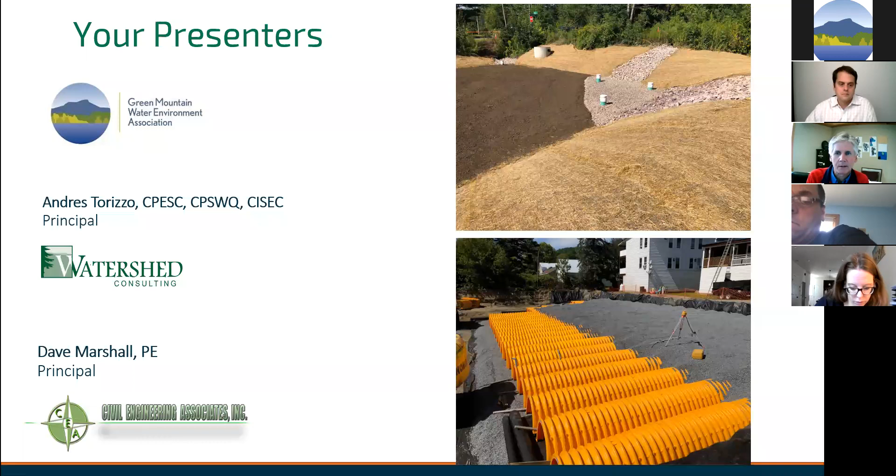This has been a continuingly evolving component of what we do and ultimately what we're seeing as far as the products in the field. So that being the background, we'll have Andres take us to the next level of the presentation today.

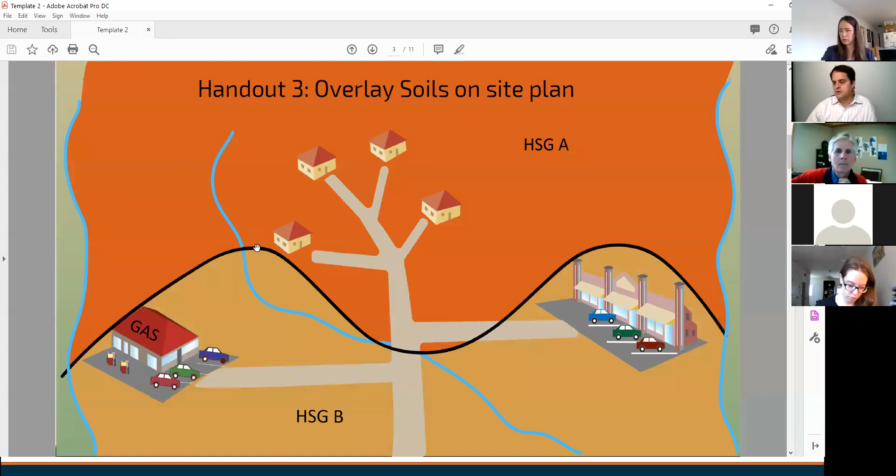And one thing to just know, we did send around some learning information ahead of time, which you all should have. And there's a couple documents in there which will be useful. One is the agenda, which I'm putting up right here. And the other is a series of handouts. And we're not gonna actually get into the handouts today. This is all gonna be on day 2, but if you just wanted to start looking through this and familiarizing yourself with these handouts, these are gonna be needed tomorrow when we go through the exercise. Okay?

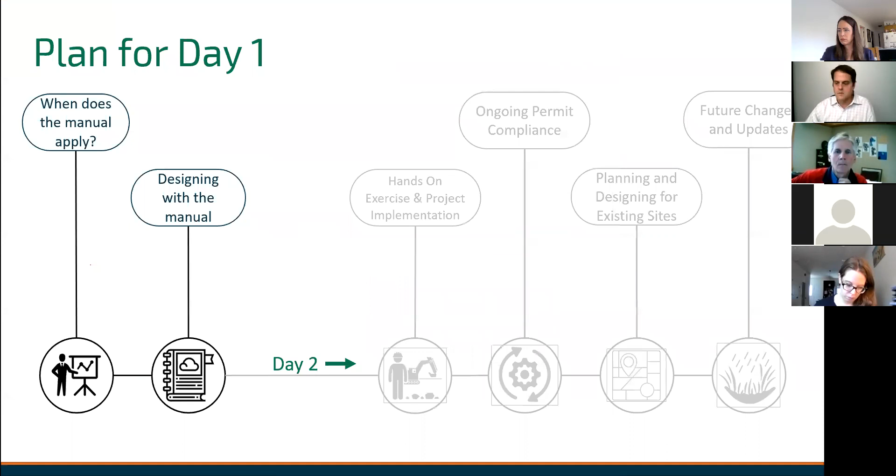So with that, we're gonna start just from square one. So when does the manual apply? So this is a screenshot right from the state's website, Stormwater website. And there's a lot of things stormwater now in Vermont. It's amazing how it's changed since I've been involved with new programs, municipal roads programs, multi-sector general permit programs, MS4 programs. We're focused on the operational permits. And the operational permits currently are 90-30, 90-15, 90-10, or INDS.

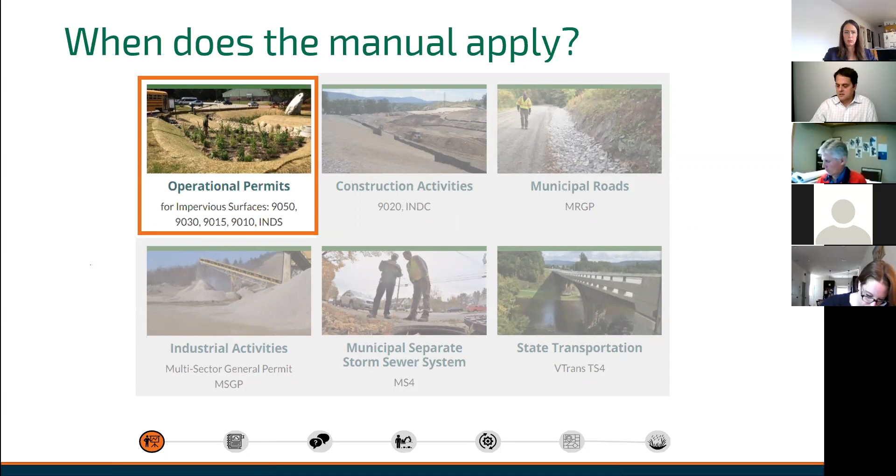We're in a state of change right now. The 90-50, which is the first one listed there, is going to be the only operational permit. Everything is getting funneled into the 90-50. The 90-50, signed September 1st, 2020, going into effect December 1st, 2020, is going to change a lot. I think hopefully simplify a lot in terms of corralling all these permits with all these numbers and kind of streamlining it and making it simpler for everybody to track. So that's really what we're focused on.

And when the 90-15, 90-10, soon to be 90-50, when the operational permit comes into play is a couple different scenarios. And we're gonna just run through these scenarios together here. And then we're gonna save some time after this to answer some questions and chat about this, because there's certainly some odd situations that come up.

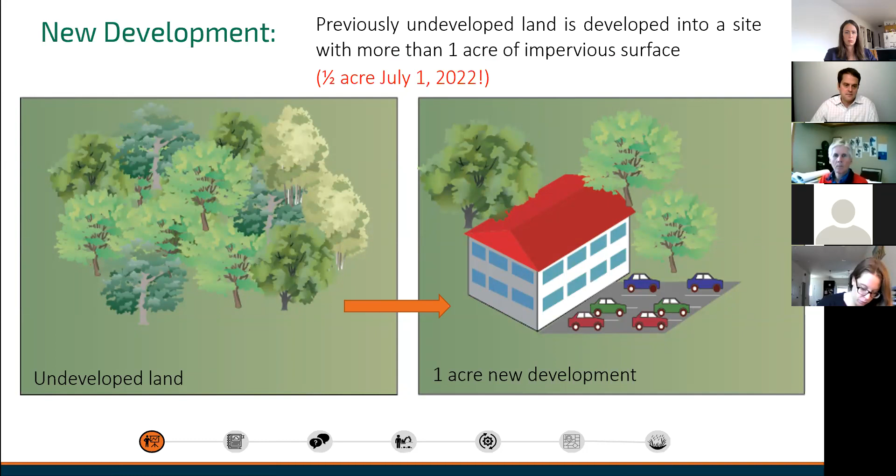I think the simplest one is where you have a new development which has 1 or more acres of impervious surface. And you're creating that impervious surface, you'll need a permit. After July 1st, 2022, the threshold is gonna go down to 1/2 an acre. We also have a lot of situations where we have a smaller development which may have less than 1 acre of developed land, and we're expanding to 1 acre or more of developed land. You're in a permit situation there.

We also might have an existing site which has more than 1 acre of developed land, and now you're adding at least 5,000 square feet of new impervious surface. And so even though that existing site may have been in existence for quite a while, if you're expanding off of it and creating this 5,000 square feet of new development after July 1st, 2005, that new development would need a permit.

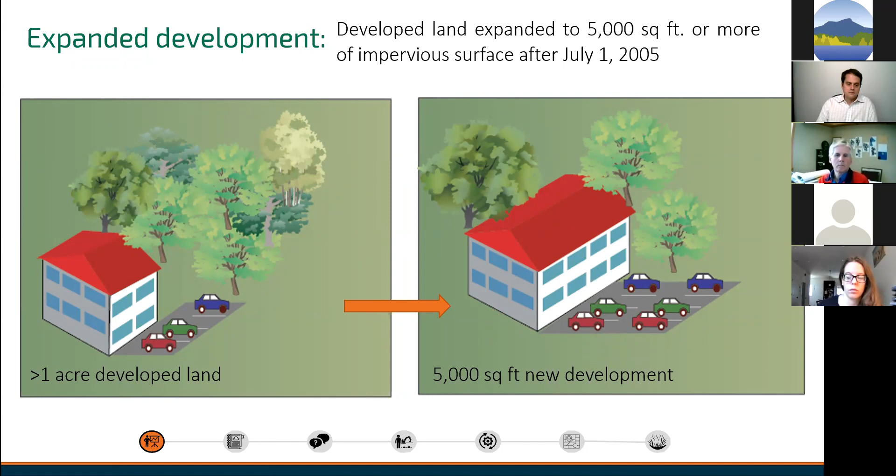Then you get into a situation where you have a redevelopment. So you have an existing site, an acre's worth of impervious surface, and you're suddenly converting that now to 1 acre of developed land. And I think just make a special note on redevelopment, because redevelopment I think is one of these gray areas that comes up a lot. Is it redevelopment? Is it maintenance? That's a big question. And there is a definition in the rule which specifically describes what redevelopment consists of or doesn't consist of.

But I think in terms of, say, a parking lot, it's really when you're doing a full depth reconstruction of the parking lot and you're modifying the drainage. So if you're adding catch basins where there was sheet flow, or you're taking one parking lot which drained one way, now you're draining it the other way, and you're going down into the sub-base and rebuilding the parking lot. That's redevelopment. Same situation if you have a parking lot and you're putting a building. It's redevelopment.

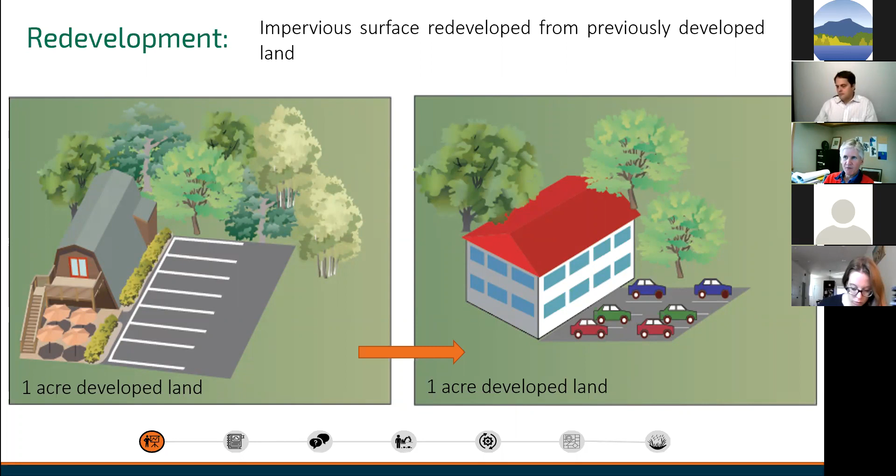Andres, Dave Marshall here. One thing that we ran into that Kevin Burke helped us with was we were rebuilding a city street in Winooski, and the definition from Kevin was anytime you are replacing or redeveloping the top 6 inches of an existing structural surface, that was where you could consider it redevelopment or actually new construction. So that was a refinement of the definition. Because the standards as far as how hard you have to work to deal with the treatment of the stormwater runoff that perhaps didn't have any practices in place prior is different between redevelopment and new construction.

Yeah, that's a good point, Dave, and I think that also goes to the fact that there's definitely some interpretation in these, and it's worthy of a discussion with the reviewer, obviously, about some of these things. As Dave was saying, that was a discussion with Kevin. Kevin, unfortunately, is not with us today yet. Somebody from DEC may jump on at some point during the training, but it's definitely not always black and white.

Also have some, you know, situations where you might have a site with less than 1 acre of developed land, and now you are redeveloping it and also expanding it so that you have an acre of developed land. So it's both the redevelopment and new development combined. You're in a permit situation in that sense too.

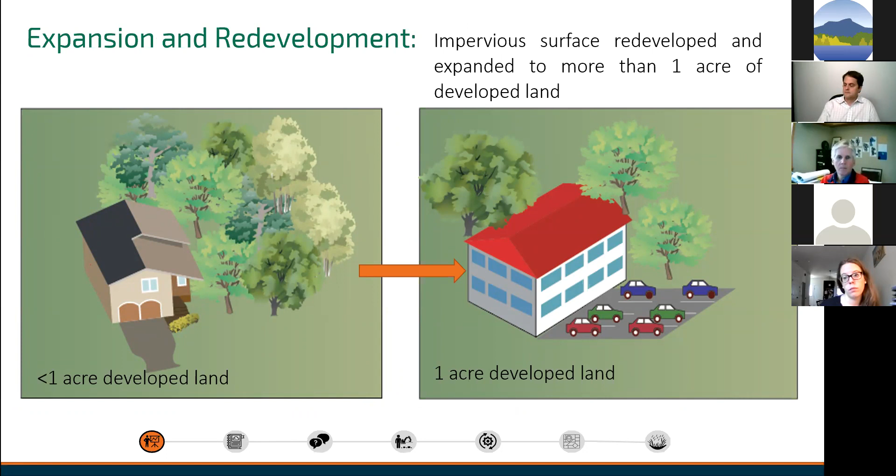And then there's any other situations. The agency actually does reserve the right to issue a permit even if it's less than 1 acre of developed land, if there's a reason that it's deemed necessary by the secretary in terms of an imminent threat to water quality. There is the right to issue a permit. So it seems like pretty much whenever you're guessing whether or not there's a need for a permit, it seems more and more likely that it needs a permit.

In my experience, pretty much everything needs a permit, especially if it's tied to any kind of an existing development. It seems like you're probably in a permit situation. And I think as we go down to a half an acre of impervious, you're going to be getting into situations where even small developments are going to be tripping the threshold.

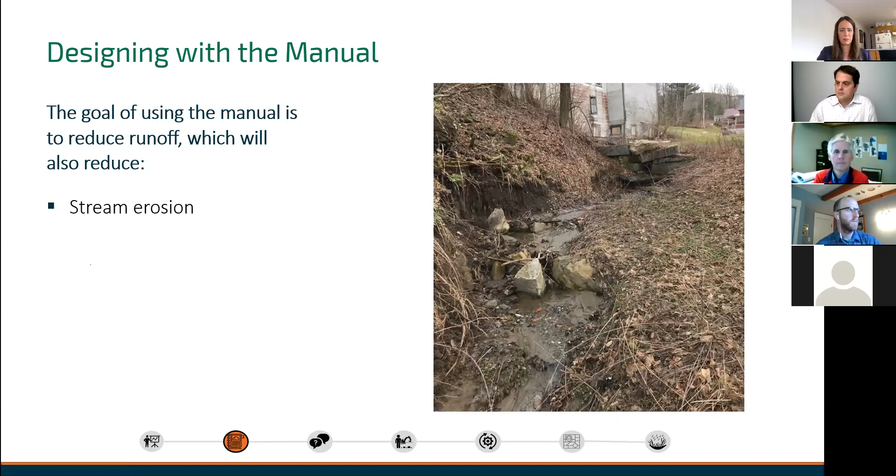So if there's no more questions, we'll move into the next section about the foundation of why the manual is set up the way it is. It's based on this foundation of reducing runoff. And reducing runoff has demonstrated other beneficial impacts to downstream conditions: reducing stream erosion, flooding, pollution, improving water quality, and making sure groundwater reserves are not depleted. So when we talk about runoff reduction, we're talking about reducing the volume.

So not necessarily just taking care of the peak discharge, but really reducing the amount of water flow that's running off a site to begin with. That's a bit of a shift from where stormwater was in 2002 when the manual came out. It was more focused, I'd say, on detention, and now the new manual is structured to guide you to maximizing getting rid of that water on site first so you have less runoff moving from the site. Oh, and I forgot habitat degradation as well.

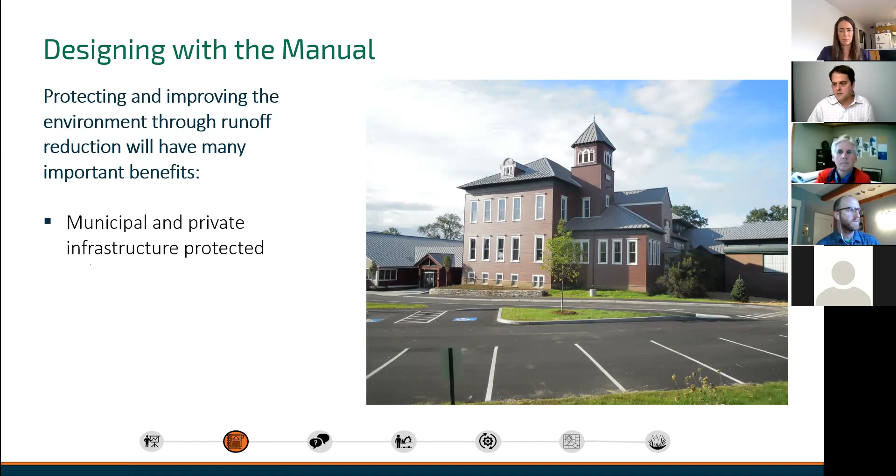So the benefits of this runoff reduction method are many. There's benefits to municipal and private infrastructure. There's benefits in the long term in terms of O&M costs: less O&M costs, less water, less maintenance.

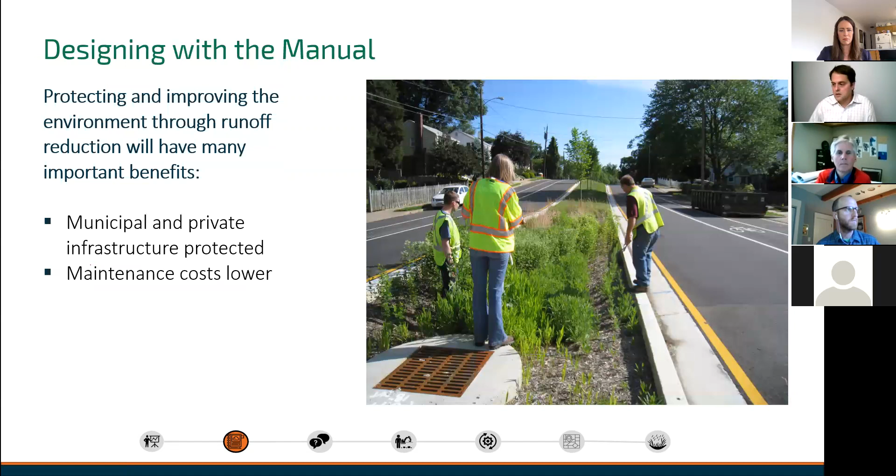A lot of these practices which are focused on runoff reduction have some aesthetic value, or at least some potential to have an aesthetic value, because a lot of these are plant-based systems, and so there's opportunities to improve aesthetics on sites. And then there's community health and safety, and this is really clear, I think, in more of the downtown green infrastructure, green streets type environment, where you're starting to see in a lot of areas in Vermont, downtown areas that are being greened.

There's a lot of ancillary benefits to that greening that go beyond water quality: placemaking, multimodal transportation, sustainability, air quality. So there's definitely a lot of other benefits to this approach that go beyond just stormwater.

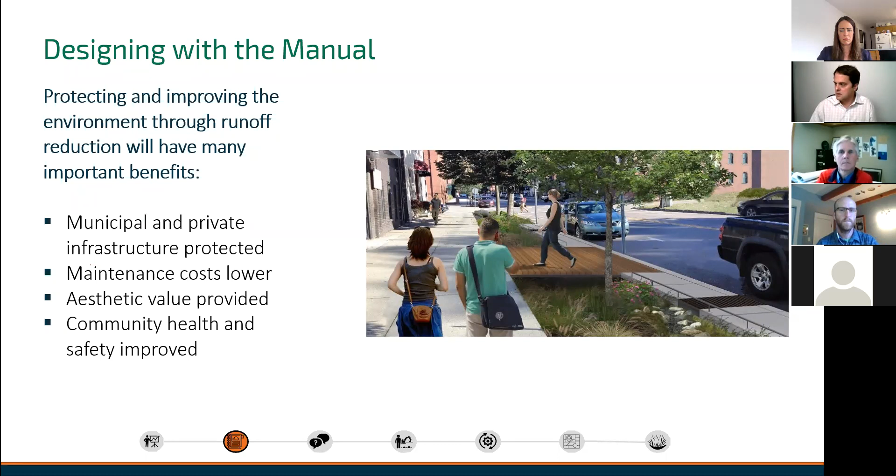And this is an important slide, and this is really the core, I think, of the manual. You're going to see this treatment volume, this T sub V, quite a bit. If you open the manual and look through it, the TV shows up a lot. That's the amount of water that you're trying to reduce by crediting, designing your site a certain way. We're going to talk about crediting, what that actually means, but also installing BMPs. You're going to be calculating this TV, and then you're going to knock it down by doing either structural practices or non-structural. We'll get into the difference of what those two things are a little later.

In the foundation, the way that the manual guides you towards knocking down this TV is through this tiered system. So tiers 1, 2, and 3. The manual is set up so that you need to first analyze whether or not a tier 1 practice is doable on the site. And if it's not, you go to tier 2. And if you can't do a tier 2, then you're going to go to tier 3.

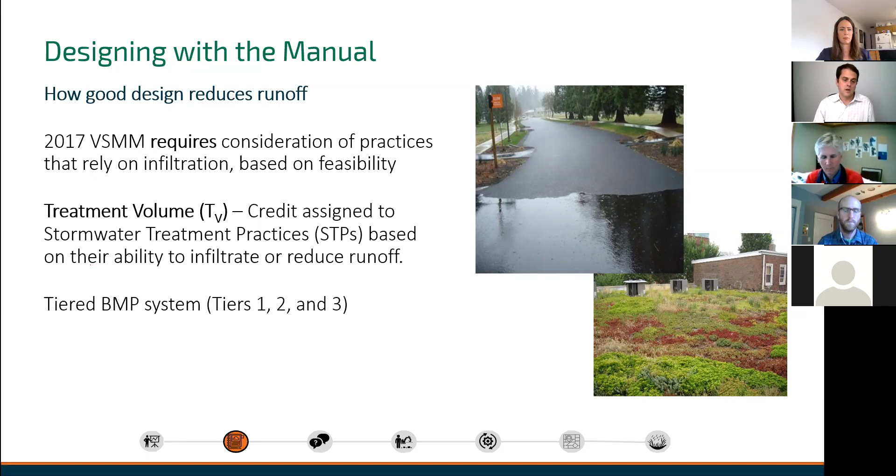And tier 1 are the best practices. Those are the practices that, by the current research that we have, really perform the best and reduce the most runoff and reduce the most pollutant loading. And then tier 2, not as good, but pretty good. Tier 3, kind of a worst case. We're going to go through specifically some examples of each of those so you guys can see what we're talking about. But this is just a graphic here to describe what I had just said.

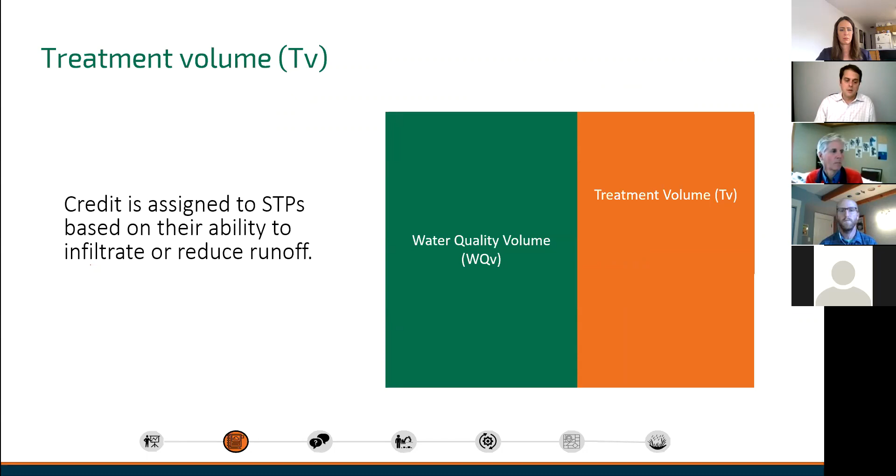So the TV is the overall volume. And within that volume, we're going to talk about some other volumes that are going to need to be calculated for various sites. You're going to have your water quality volume. You're going to have your recharge volume. You're going to have your hydrologic condition volume in some cases. I say in some cases, we're going to get into that one specifically, but I'm going to actually go through all these. That's kind of graphically how it is. So all those are nested within this overall treatment volume.

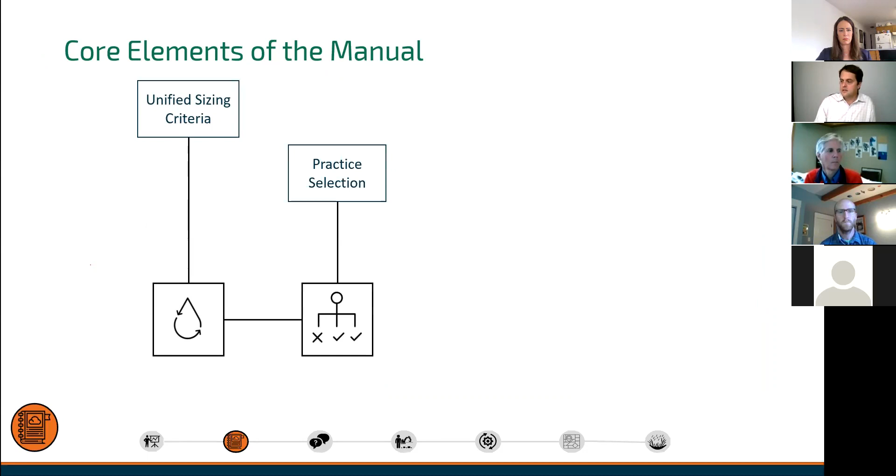So the core elements of the manual: the unified sizing criteria, which are the specific standards, and I'm going to go through that in this next section. Then we're going to go through the practice selection. We're going to talk about infiltration testing, which I think is a really critical component of the whole process, especially because the whole manual is so focused on infiltration. And so there's some really specific considerations for infiltration testing that people should be aware of.

And then reviewing the forms, so making Wynn's life easier when the application comes in, making sure everything is organized how DEC likes to see it. Makes things a whole lot easier for everybody.

So just starting off on the unified sizing criteria. The first one, the water quality treatment standard. With the water quality treatment standard, we're looking at sediment and phosphorus. We're looking at all the pollutants in the stormwater. And we're looking at managing those small but frequent storms.

Groundwater recharge, we're really looking at all storms, but we're looking to maintain groundwater levels. We don't want to develop a site, basically a nice A site with sandy soil, and then all of a sudden we're paving it, dramatically reducing the amount of infiltration, the groundwater table drops, less base flow in the stream. That's not a good situation. So we're trying to protect that by maintaining groundwater recharge.

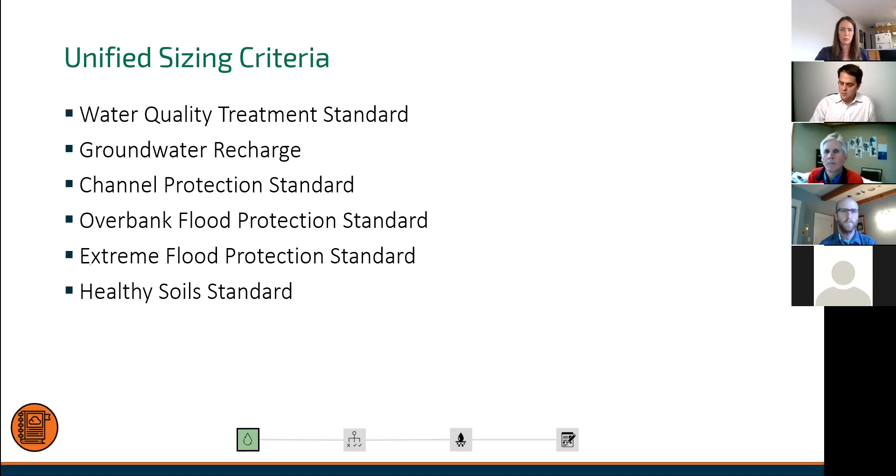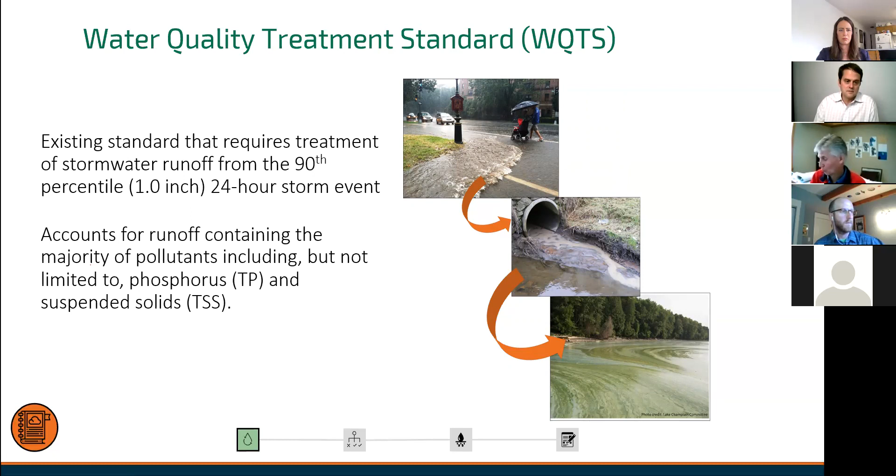Just to dig into this a little more, talking about the water quality treatment standard, as I was mentioning, it's the 1-inch storm, so it's a 90th percentile storm, 1 inch, 24-hour storm. So that is where the major source of pollutants are originating, including phosphorus, our target pollutant here in Vermont, and also sediment, right? So we have phosphorus, we have algae blooms. All that is a consequence of our managing our small flows. And in addition to large flows as well, which I'll get into a little bit.

So in the context of when we talked about the difference between new development or expansions and redevelopment, that really comes into play with the water quality treatment standard. In a new situation, you are managing the full water quality volume, so that's 1 inch of rain. But in a redeveloped situation, where you're redoing a parking lot that's already there, converting it to something else, you're only required to treat 50% of the water quality volume, or removing 25% of the existing impervious surfaces, or a combination of the two methods. So essentially you're getting a break from the full-blown manual requirements when you're in a redevelopment situation.

And this is going to come into play tomorrow when we talk about the new 3-acre rule. We have some slides on that, and the redevelopment standard is going to apply to those sites. So that's essentially how you're going to view these 3-acre sites, through this redevelopment standard. So it's 50% of the water quality volume.

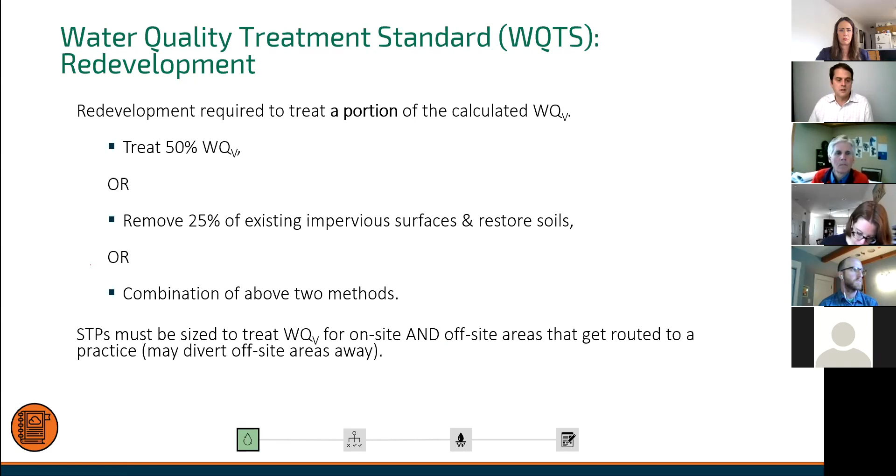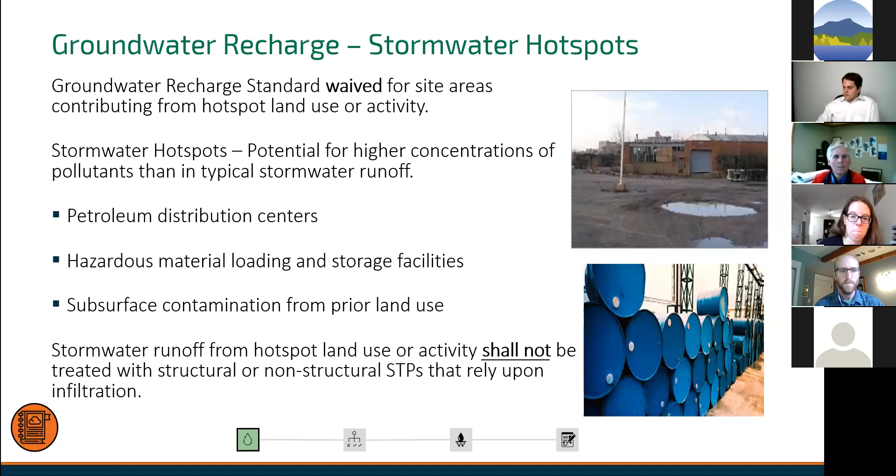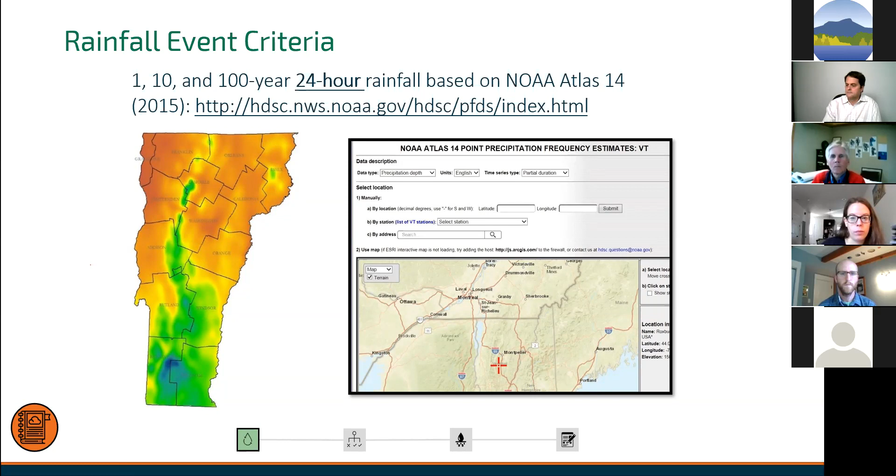So the channel protection standard, the new manual allows a little more flexibility in terms of how you can go about meeting this standard. And one of the ways, there's 3 different ways, and I think the new one that we'll talk about first is this hydrologic condition method. In the manual, you'll see this as HCM. So that's really this runoff reduction focused approach.

And so I'm going to get into what exactly that means on a few slides, but essentially that means just reducing, we talk about reducing the volume, the framework of the manual. This is specific to reducing the volume of the 1-year storm coming off your site, and you can claim compliance with that standard by knocking that volume down.

The second way is the extended detention method. So for those that have been working in the 2002 manual, same idea. So having a big area, a pond, draining it through a small hole. So really metering out that 1-year storm over a long period of time to eliminate this peak into the stream, which has impacts to the banks because the stream is running high and it's running long and it's weakening the banks, and you get in-stream erosion and instability. So that's really what we're trying to prevent.

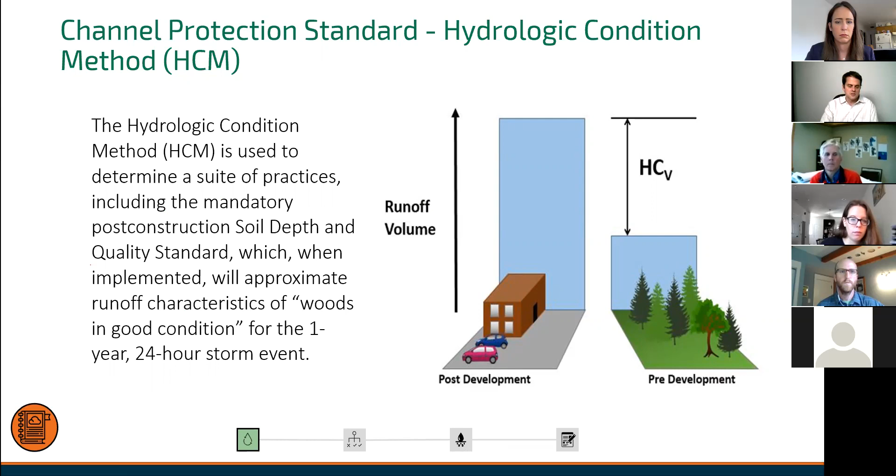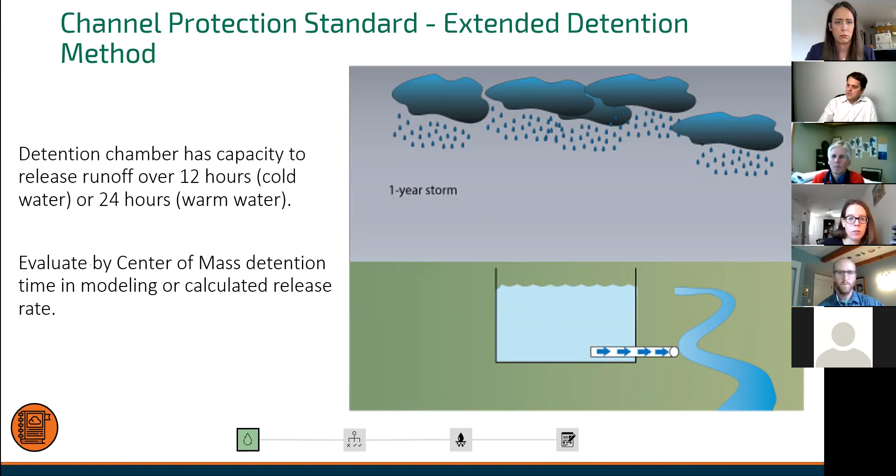So the second, extended detention method, so this is the one that's been around since the 2002 manual. Here's our pond. This is our outlet. Imagine you have a small hole on the end of this pipe, collecting all that water and just bleeding it out that small orifice. That's the extended detention method.

And then you have a proposed condition where you just have that water dispersed and diffused. And if you can demonstrate that the peak discharge is the same in those two conditions, then it should be acceptable just to go with the condition where it's diffused, because essentially the diffusion is doing the work that putting in this basin would be doing. That's what you're proving out, that, hey, same thing. We're getting that benefit by just diffusing the site.

And so that could be a good tool if you have a site where you're really trying to diffuse the water, not really collect it all in one location, potentially save on cost by doing some lower tech solutions. That could be a good option to explore.

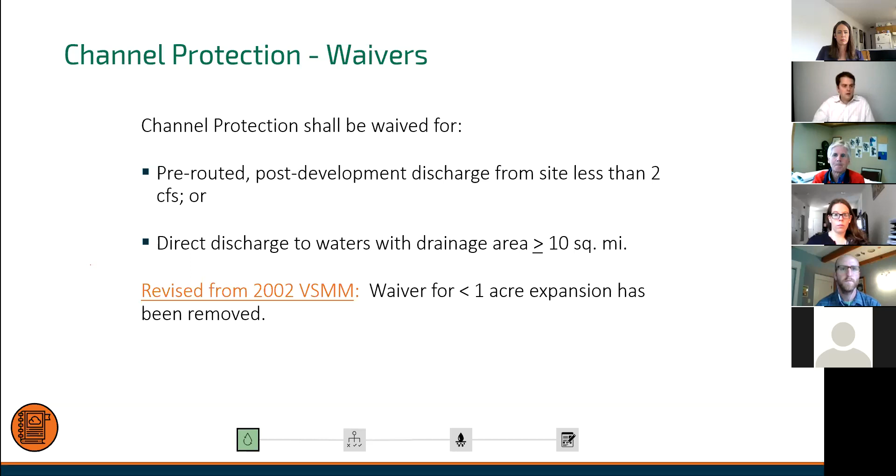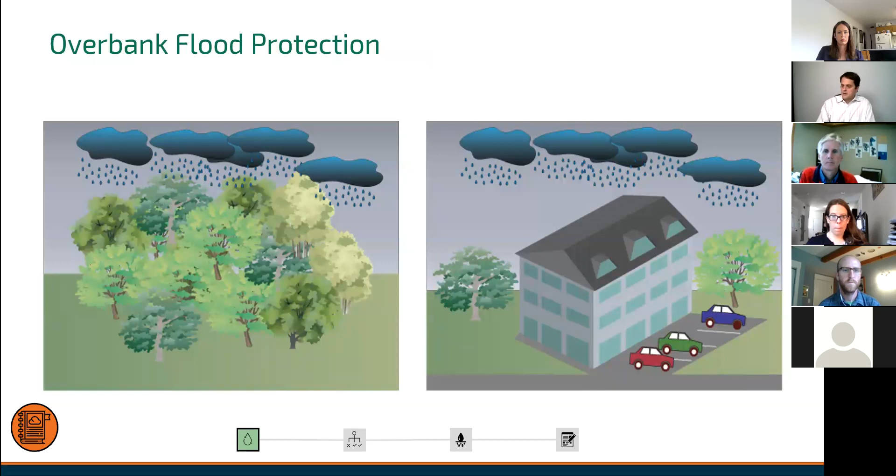So with the overbank flood protection standard, we have on the left, this is your undeveloped site, and then on the right is your development. So following the 10-year, 24-hour storm, peak discharge is equivalent between the undeveloped and developed sites, or preferably even less. But again, this is something that's borne out with hydrological modeling, understanding what your peak discharge is in the existing condition on the site that you're starting with versus post-development. Making sure to match, bring down that peak discharge for the 10-year after development.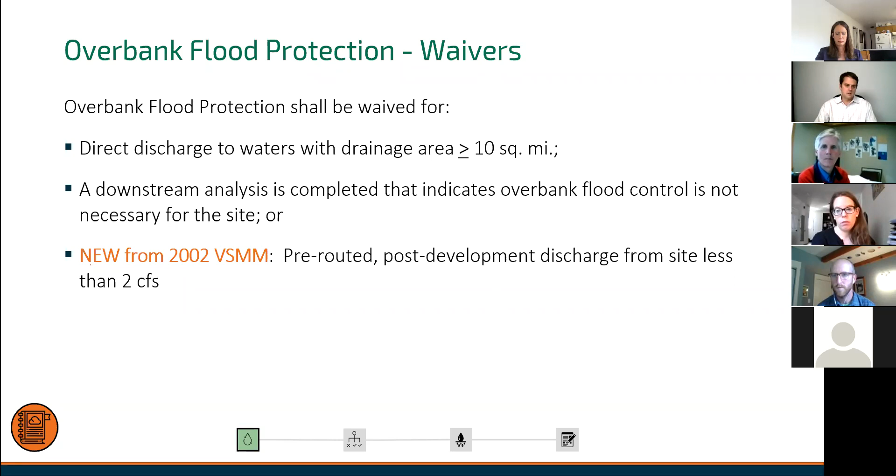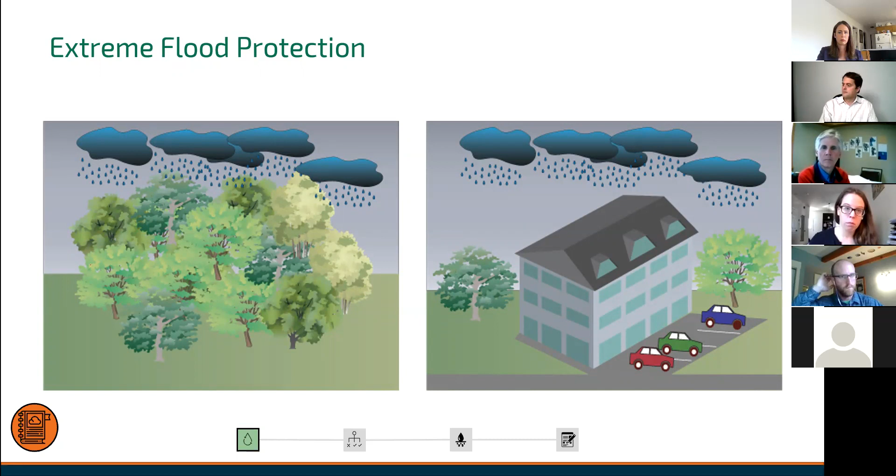So then the extreme flood protection standard, as we talked about, getting into the sites where you have 10 or more acres of impervious surface. So these are the big shopping centers, college campuses, the largest kind of development sites in Vermont are subject to the extreme flood protection standard. So just like the 10-year, but really just looking at the 100-year, which is 5 inches plus of rain, peak discharge is equivalent between the undeveloped and developed sites. Preferably less, right? Preferably we're designing things which are actually even going to reduce that peak discharge.

So with the waivers that are allowable, same one with the 10 square miles, we talked about that with the channel protection, and then also the overbank flood protection standard, same waiver applies. And then talking about if the impervious area on site or otherwise associated within a common plan of development constructed after 2002 is less than 10 acres. So remember we talked about that, where you draw that line.

So there is a way, but essentially, if you're in a situation where you've developed more than 10 acres after 2002, you're going to be in a situation where you need to meet the 100-year standard.

Yeah, and then, I'm sorry, I'm just being rude. Just going back to the statement or the term common plan of development, that can bring in a lot of properties that perhaps a client or an applicant does not control. So one of the rules of thumb that we've been advised to use is, for example,

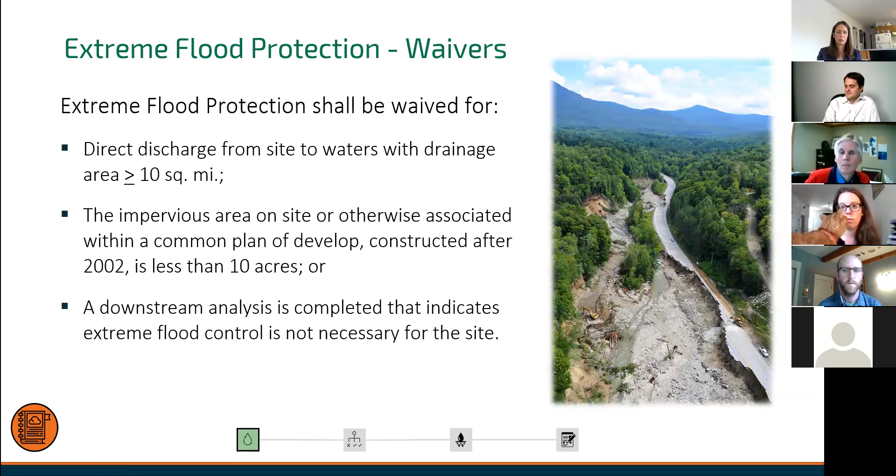So then after the 100-year standard, talking about the post-construction soil depth and quality standards. So this is a new standard in the manual. And Dave, you can run through this if you'd like, or I can, either way. Yeah, we'll kind of tag team this one. This is, as Anders points out, a new component, and this is one that we're wrestling with contractors to implement as part of the construction phase.

Specifically, the goal is to restore the soil profile in a manner that is representative of what the pre-development conditions were. So one thing that we've historically seen, if you can imagine a building being put in place and you have all sorts of construction equipment around the outside of it, you probably have had the contractor strip the topsoil and stockpile it off the side, but underneath that top 4 inches of topsoil that's been stripped off is the substrate, and that just has historically been compacted significantly

only because of all the lifts, all the other construction equipment accessing the perimeter of the site, to the point where when there is a series of storm events that otherwise could be stored in the vertical profile of the soil, it might be stored in the top 4 inches, but everything underneath is so compacted that it doesn't infiltrate in. And we now essentially have more runoff than what we had from a modeling standpoint of pre-development conditions.

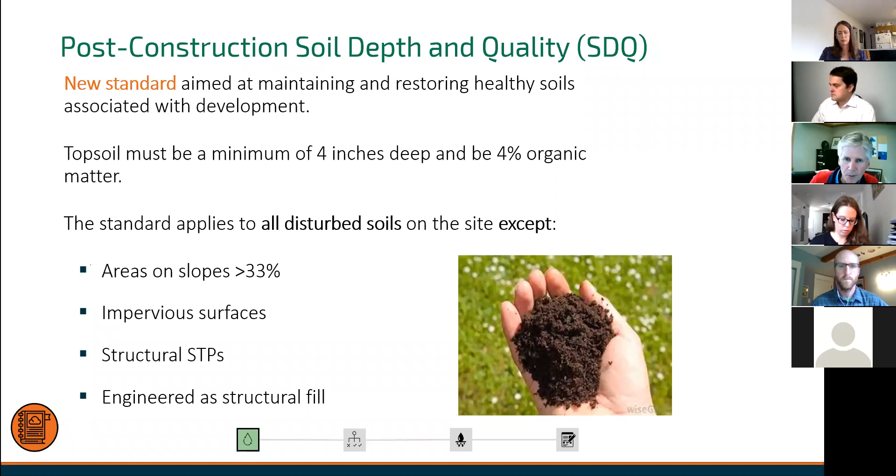There are situations where we design over steepened slopes or certain functions on the site that rely upon very stable soils and not loose soils to provide the structural integrity from a stability standpoint. And those particular features or components of a site are also exempted. So if we can go to the next slide, we can talk a little bit about exactly how this occurs.

And one option simply is don't mess around with the existing topsoil. So if you can create a situation where you make a physical improvement adjacent to undisturbed area, and you can basically protect that undisturbed area from anybody driving by mistake or otherwise on top of it and creating compaction, then you basically get a free pass in regards to having to modify that.

But in those particular areas where we are stripping topsoil and looking to replace it, we need to, in the top 4 inches, as you can see on the right side of this screen, basically make sure that those particular soils that are going back do have the 4% organic component. And if you're fortunate that the native soil already has it, then you're good to go. If it doesn't, then you need to be adding some soil amendments, most often some form of compost, to beef up that particular organic content.

So again, the ability to understand this ahead of time is so important to basically make sure that your specifications and design plans and permit plans are properly reflecting where you're coming from and where you need to go. So especially for the contractors, because soil testing will tell you what you've got for that organic content. And more importantly, it'll allow your contractor to understand just how much amendment he or she will need to put into place in order to comply with the requirement.

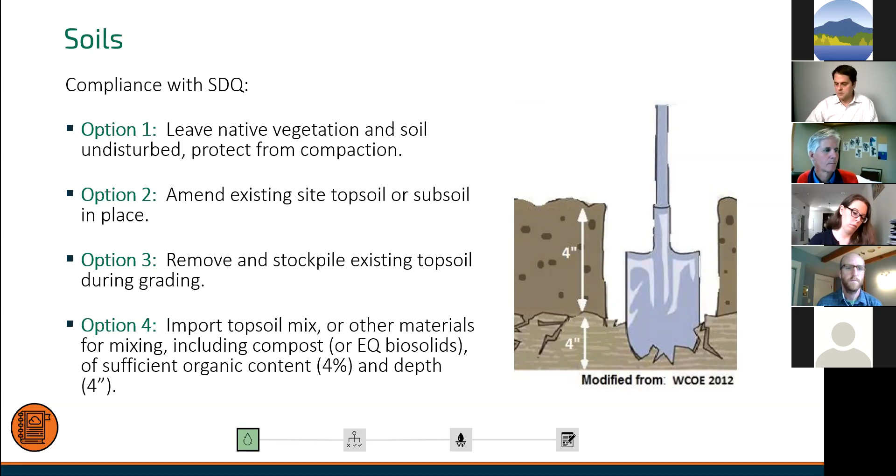So I had noticed in the chat there's some really good information that people should pay attention to from the state, from Hugo here. We were talking about contamination, potential impacts to contamination, and one of the pieces of information here is that the sites management section has guidance on conducting subsurface work within the right-of-way that is very nearly in final version. And then confirming the ANR Atlas is definitely a great tool. So we were talking about looking at potential hazardous waste sites in proximity to our site.

Andres, can I say something? Please. Yeah, I've done a lot of projects in hazardous waste for like 35 years, and there is growing work of stormwater management in the urban centers. And so the problem is that it's not just only the sites that are listed, but there are historic conditions that have not yet been found. And if someone doing a stormwater project inadvertently digs into that and mobilizes the water or extracts soil and transfers it somewhere, they need to understand that there will be liabilities post that work, because if somebody subsequently finds this is contaminated, that dirt needed to be handled in a different way.

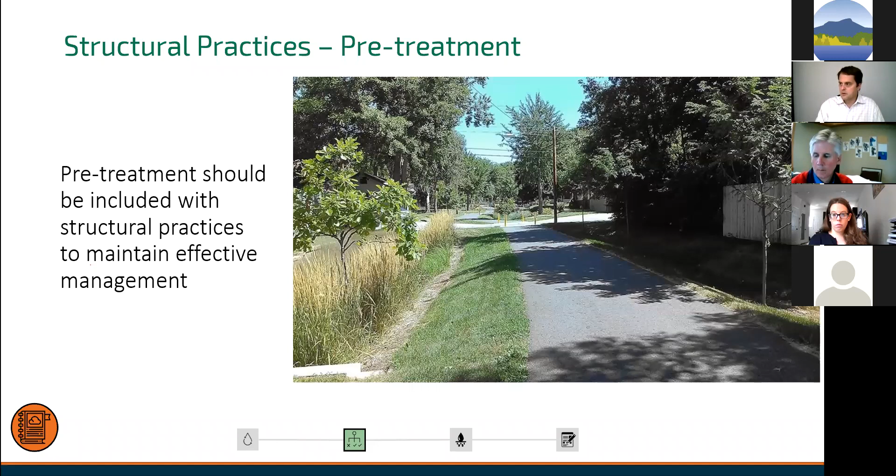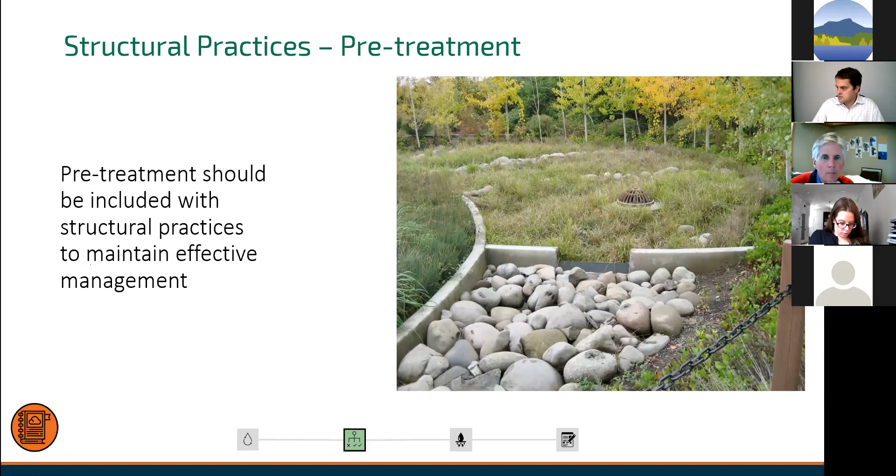This also gets into a question of alternative treatment practices. I'm not sure if Wynn is back on yet, but he could probably speak to this. Yeah, he is here. In terms of how the DEC is dealing with all these new systems which are coming out all the time. And some of them are great, but there has to be some way to make sure that they work and make sure that they're meeting the standards. And so the state now has a process for basically reviewing and approving these alternative treatment practices. Wynn, would you mind just saying a word or two on that?

Yeah, so there's a proprietary practice section in the manual, and it lays out what's required. For the most part, third-party field testing has to have been done. And based on that, if it's a pre-treatment practice, we would need to see that it removes 50% of the total suspended solids. And if it were a treatment practice, we would base it on our tiering protocol of our manual practices based on the removal rates of phosphorus and total suspended solids. So tier 1 being 98% TSS and 80% phosphorus, and then it goes down from there.

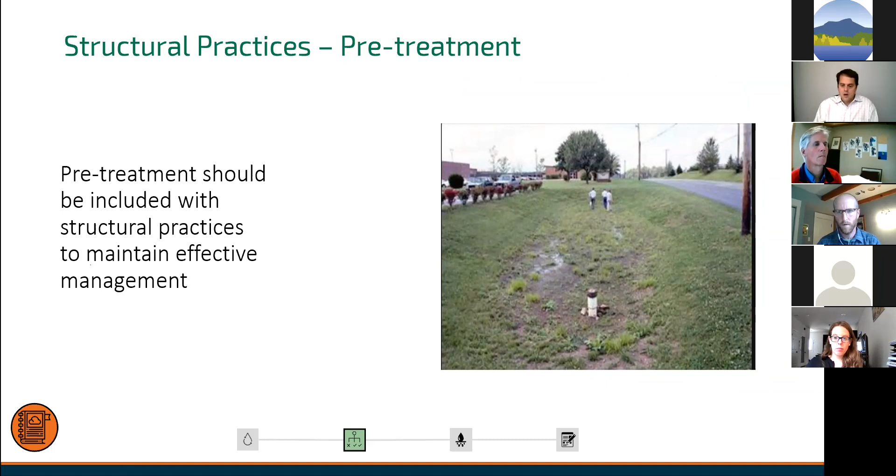Another pretreatment structure here, swale. Swales used to be primary treatment. They're no longer approved for primary, so they're now just pretreatment type structures. So in lieu of a forebay, you can have a swale. And this is kind of a busy slide, but it gives you an example of some of the things in the manual in terms of the criteria for being able to demonstrate that you have a structure which is going to qualify as a pretreatment structure.

So in terms of the swale, you have to demonstrate that you have a 5-minute residence time of the water quality storm peak discharge. So what does that mean? First of all, how do you prove that out? The easiest way is through modeling again. So modeling the 1-inch 24-hour storm, which is the water quality event, modeling that flow through your swale, and then looking at your modeling results and seeing the detention time within the swale, making sure that water is going to be sitting in the swale for at least 5 minutes on average as it travels through. And that's an assurance that there's going to be enough time to have the sediment and materials drop out into that pretreatment swale before it goes into the main structure.

The manual also has an allowance for a filter strip as a pretreatment structure. And this table, I think, was inadvertently left out of the manual. I'm not exactly sure that it hasn't been replaced with an updated version. I don't believe it has, but there was a table originally left out of the manual by mistake, and it was related to these parameters, which describe how long your filter strip needs to be and the slope of the filter strip. So when we say filter strip, what do we mean? Essentially just a grassed strip off of, say, an edge of a parking lot where the water can sheet flow over that area and get the pretreatment necessary before it goes into something like a bioretention area.

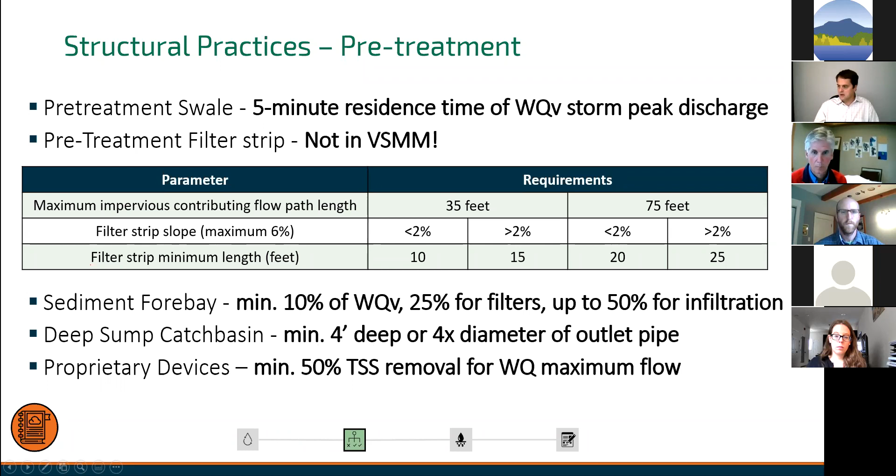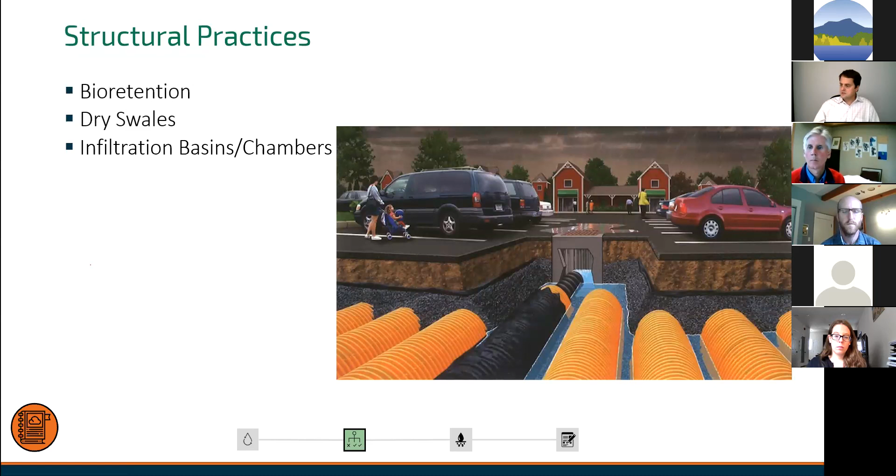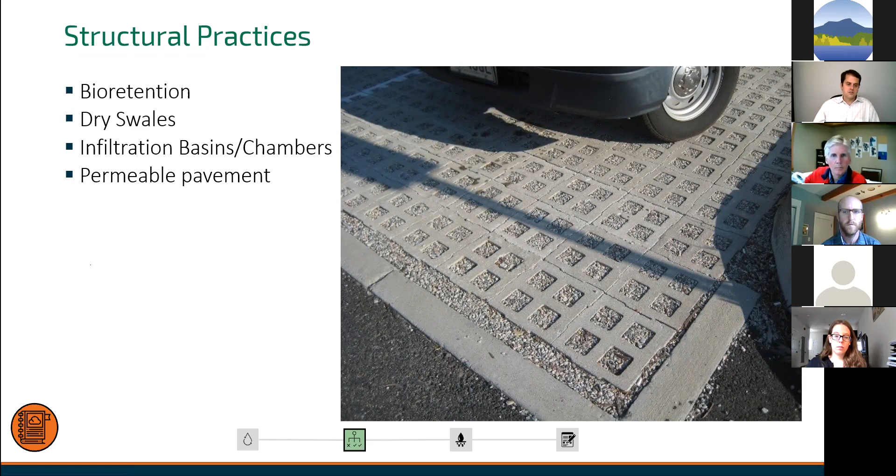So now moving from the pretreatment to the primary treatment structures, we're talking bioretention, dry swales, infiltration basins and chambers, so these are underground. Permeable pavement: getting back to an earlier question, permeable pavement is a way to get out of a permit to begin with, but it's also a way to manage your stormwater if you're in a permit situation.

Filtering systems, so sand filter. Treatment wetlands. Gravel wetlands in particular, I think, have become much more popular. There's a ton of them being constructed now, where normally people would have been constructing wet ponds. So that's a very popular practice. And the wet ponds and dry ponds are still around.

We were talking about the tiers, and a wet pond is a tier 3 practice. So you really have to show that your site needs to have a wet pond in order for it to be approved. Wynn might confirm this for me, but I think the case where you would see a wet pond most often is if you had an existing site with an existing wet pond, and you're expanding the site and need to modify that existing wet pond.

The state is not necessarily going to make you convert that wet pond to a higher performing structure. I think the fact that it's there to begin with could be justification that you could essentially just expand it out and stick with that current BMP. Is that still the line of thinking, Wynn? Yeah, that's generally the way it's viewed.

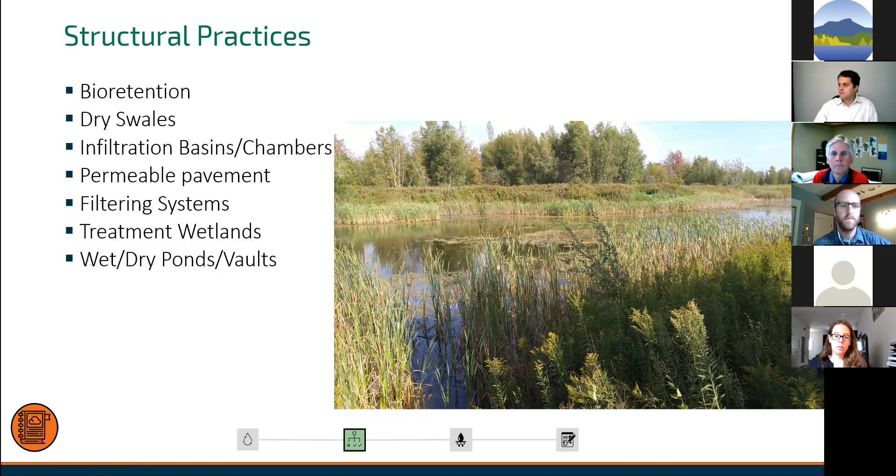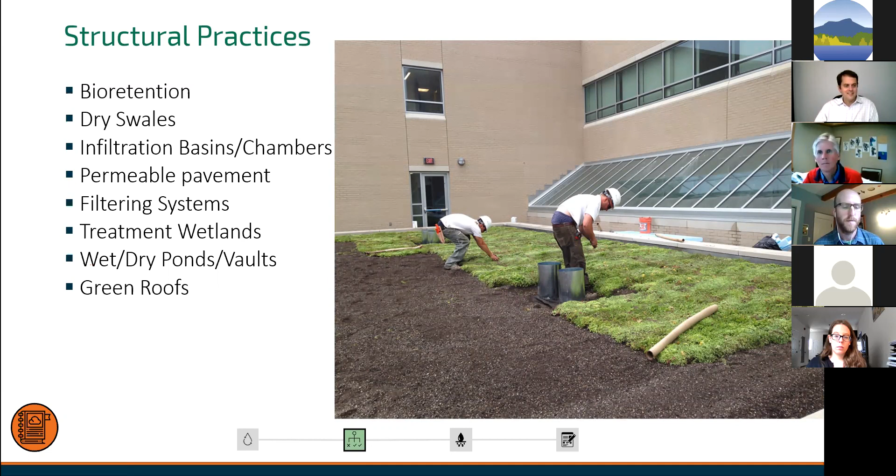Green roofs, not super popular. Wynn, have you ever even seen one of these come across your desk? Maybe at the airport or something. But not many, no. Rainwater harvesting is definitely becoming more popular. So capturing that water and reusing it as gray water on site is an option now in the manual.

Alternative systems, we talked about these in the pretreatment section. There are also some primary treatment approvals that the DEC has that can be functional for standalone compliance, and I think the jellyfish is one of them. They're not cheap. They're compact for sure, they can be put underground, and they're great in a retrofit situation.

But they require maintenance of the cartridges over time, so there's some pretty significant maintenance costs. Like anything, there's no silver bullet. They definitely have a great place, but a lot of the proprietary stuff is expensive over time and sometimes requires specialized equipment that a smaller municipality might not have access to. So it's just something to consider. But more and more, it seems like the state is approving these alternative treatment practices, so there's just more tools in the toolbox.

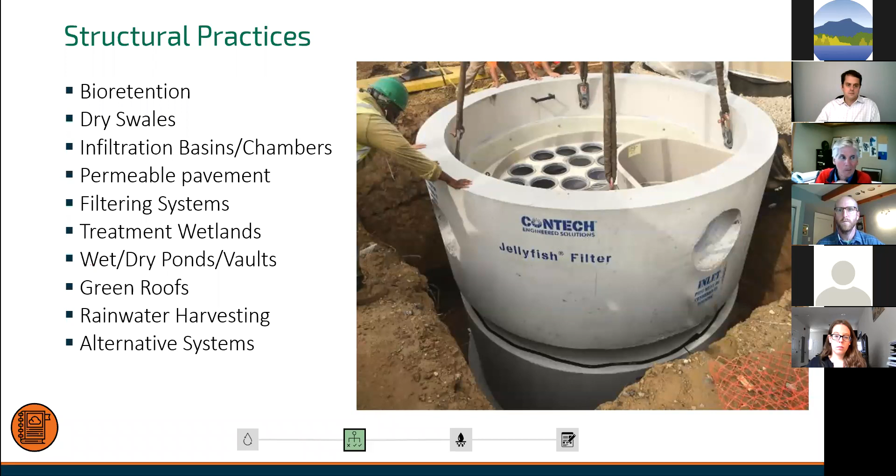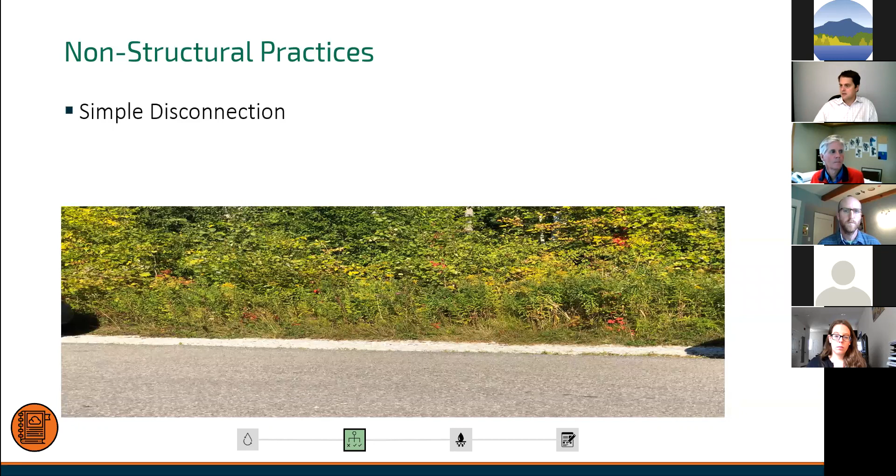So we talked about the structural stuff. So the non-structural practices, I think the manual is more focused on non-structural. So diffusion, dispersion, just passively treating stormwater as it drains the site. When we talk about non-structural things, we talk about simple disconnection or disconnection to filter strips and vegetated buffers or reforestation. These are really the key non-structural practices.

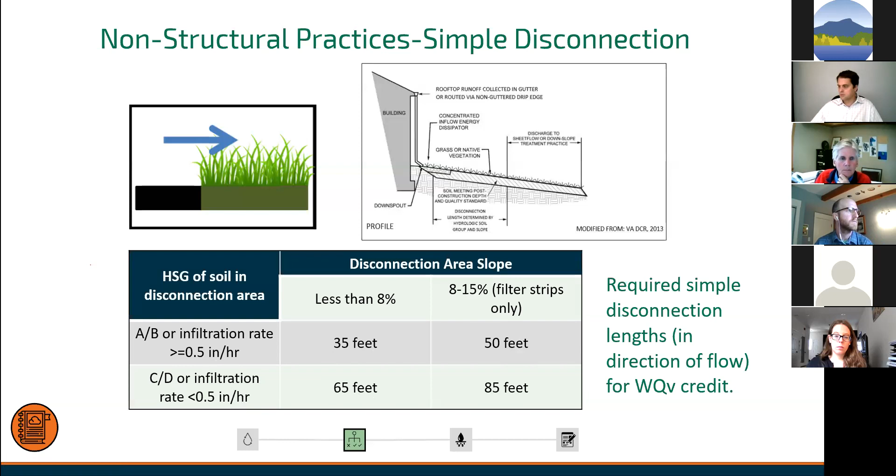So where we have a good soil, an A or a B soil, or an infiltration rate of greater than or equal to 0.5 inches per hour, we're looking at a disconnection area of 35 feet if it's gently sloped, or 50 feet if it's up to 15%. And as we go down to the soils which are not going to infiltrate as well, the lengths get longer. So you're going to need more disconnection area to provide that same level of treatment. So that's why we have the longer lengths. So that was simple disconnection.

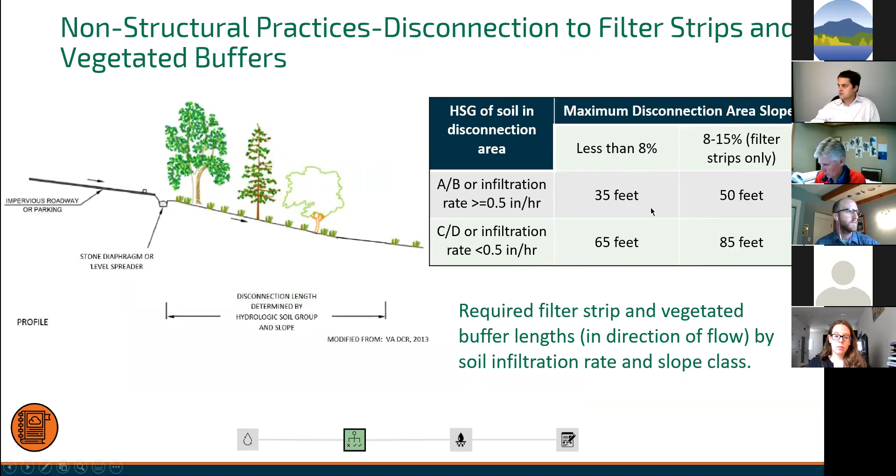The disconnection to filter strips and vegetated buffers. Really the same concept. Essentially just taking water from an impervious surface and diffusing it over a pervious surface. In the case of a vegetated buffer, we're really talking about more of a planted, not necessarily a grass area, but like a planted area. And we have the same requirements here for the disconnection area and the slope requirements, same kind of thing.

So maybe in the future, if there could be some justification to back it up, you could get more benefit, more credit, which would then encourage people to utilize this credit more often, because I don't think it actually ends up being much in terms of the overall volume. But it's something. And if you're doing it anyway, you might as well take credit for it, or it could be that motivation to do it, right?

So this is, touched on this before, right? This tiered protocol, tier 1, 2, and 3. And now I'm just going to go through it in a little more detail. And it's really, as Wynn was saying, organized by pollutant removal efficiencies and runoff reduction potential. So we have groupings of STPs based on how well they perform for pollutant removal and also runoff reduction. And by their performance, they are classified as tier 1, 2, or 3, and you need to use a tier 1 unless you can justify otherwise, down to tier 2, and then ultimately down to tier 3, which is not as common.

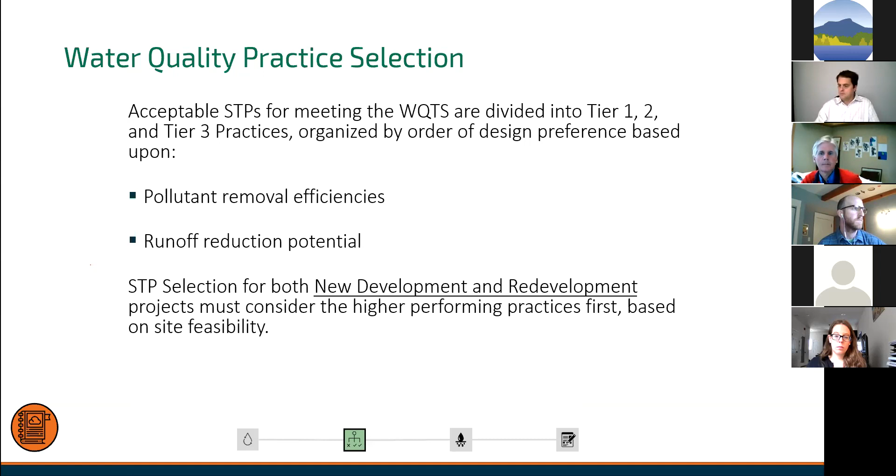So jumping into tier 1, we have, as Wynn was saying, greater than or equal to 98% TSS and greater than 80% total phosphorus. And the STPs that are in that category include infiltration basins, trenches and chambers and dry wells, bioretention, note designed to infiltrate, meaning no underdrain. So when the water goes in and infiltrates into the surface of the bioretention, it's not coming out anywhere.

Dry swales, same thing. So dry swale just being a grass swale. It looks like a grass swale, but underneath the surface, you have a sand bed. So when the water is traveling through the swale, it's infiltrating, going through the sand, and then ultimately going away into the ground.

Filters designed to infiltrate. So again, a sand filter, same exact idea as a dry swale, but just imagine a basin. Looks like just a grass basin from the surface, but when you dig down in, you're going to have a couple feet of good construction sand there, which is going to act like a filter and remove those pollutants.

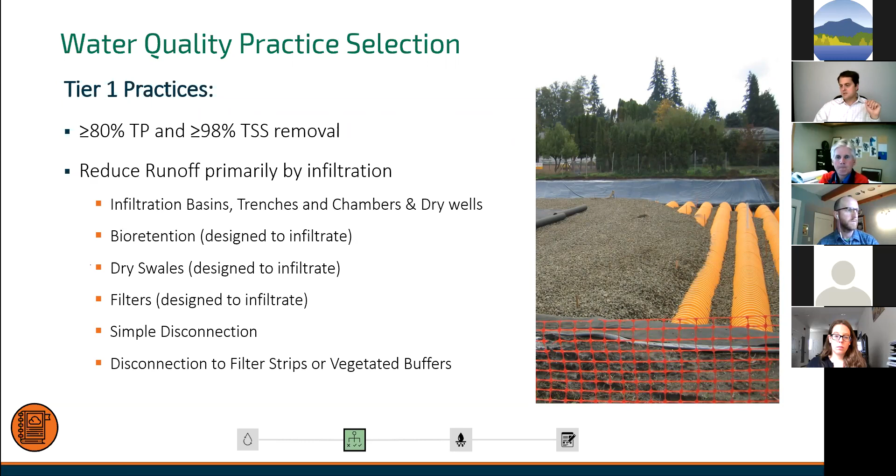Simple disconnection. So we talked about disconnection over the surface. That is a tier 1 practice. It's not going to get you all the way there on a lot of larger sites. You're going to have to do things in addition to that, but it is a valuable tool for sure. Same with the disconnection to filter strips or vegetated buffers.

So in order to prove your feasibility constraints for use of tier 1, so if you get to your site and you say, geez, got to look at all these tier 1s, which we just went over, you're going to be looking at these criteria in the manual. What are the soils? So if the infiltration is less than 0.2 inches per hour, that really takes infiltration off the table.

So it takes infiltration basins off the table, trenches, the chambers, potentially even a bioretention without an underdrain, a sand filter without an underdrain. So that limits you right away if you're in a situation where you have poor soils. However, the disconnection is still feasible. So you still have to consider, can I disconnect my roof and sheet flow it over the grass?

So I think a lot of times related to the soil conditions is the depth to the seasonal high groundwater table. We're going to go into this in some detail in terms of the soil considerations, but if you have a high seasonal groundwater table, that's going to be a limiting factor for an infiltration practice. Presence of groundwater source protection areas,

brownfield contaminated sites, and we talked about this, Hugo had mentioned this before the break. It may not even need to be a documented site. There's undocumented sites out there that also need to be considered. Definitely a tricky thing to navigate, I think. Hotspot land uses we talked about.

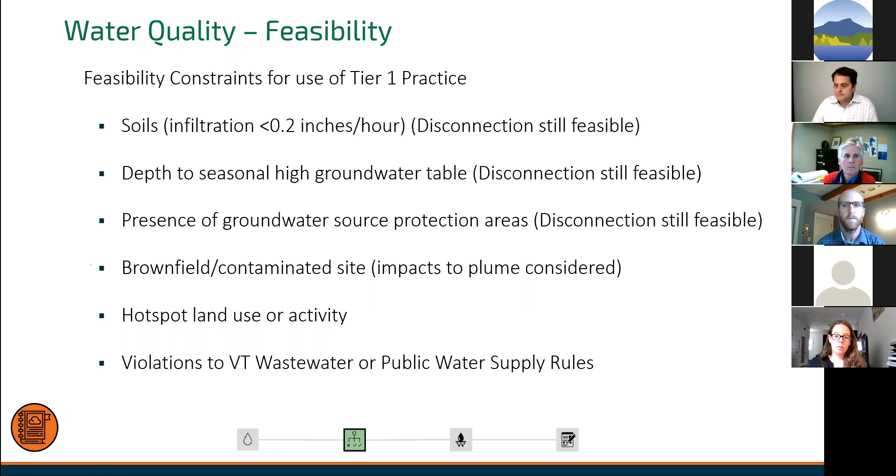Yeah, and some of the alternative treatment practices also have some good data related to petroleum hydrocarbons, where there's oil water separators built into those systems that are doing a decent job capturing some product. I'm sure not all of it. It would be the free product that it'd be capturing, but yeah.

All right, getting into tier 2. So if we can't do a tier 1, we're looking at tier 2. We're looking at bioretention with underdrains. The stormwater filters through the media, and it's recollected in a perforated drain at the bottom of the bioretention and then discharged to the water resource. That's in a situation where you have a high groundwater table or a contamination issue like we've been talking about, so the whole system is lined. So it's a filter.

Gravel wetland, tier 2, very popular. Treats by chemical, physical, biological process, anaerobic conditions in the gravel, plants. The research has shown you can get very good pollutant removal with these systems for phosphorus and other contaminants, sediment.

Infiltration berms and media filter drains. There's a section in the manual that speaks specifically to linear transportation projects, and I'm not going to get into details on that, but these are two practices specifically called out in that section that are useful for linear type projects, when you're talking about roads and you have a long stretch of runoff that you need to treat. There's some tools in there specifically applicable for that, and two of them are this infiltration berm and a media filter drain.

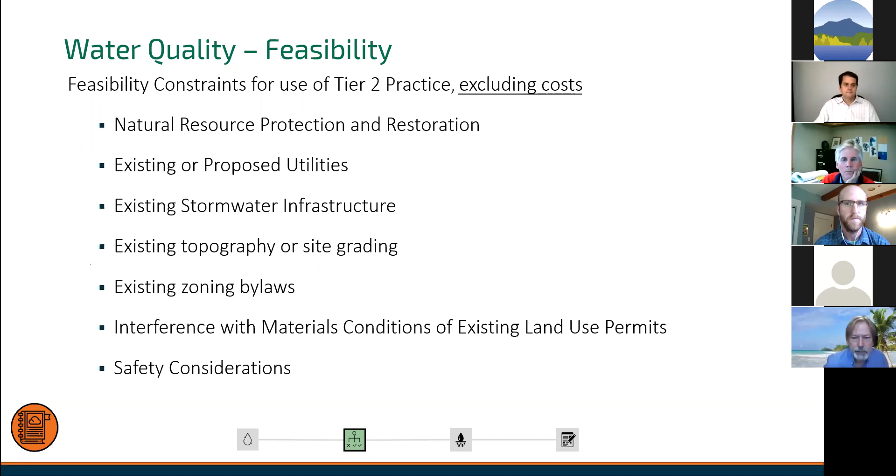So getting down into the tier 3s, we're now looking at 50 to 60% phosphorus removal and 80% sediment removal. Dry swales, not designed to infiltrate. So what that would look like is just this grass swale, 2 feet of sand, but then in the bottom a perforated drain. So when the water goes in, it's basically filtering through, but it's being picked up on the other end, and it's not just going away. There's no infiltration. It's being picked up and returned to the stream.

Filtering systems not designed to infiltrate. Again, same idea, big sand filter, but with pipes underneath. Under drain collection, wet ponds, and then shallow subsurface wetlands, which I don't think are used very often at all. Because if you can do a shallow subsurface wetland, you might as well do a gravel wetland, it would seem to me, which is a higher tier. So I don't know.

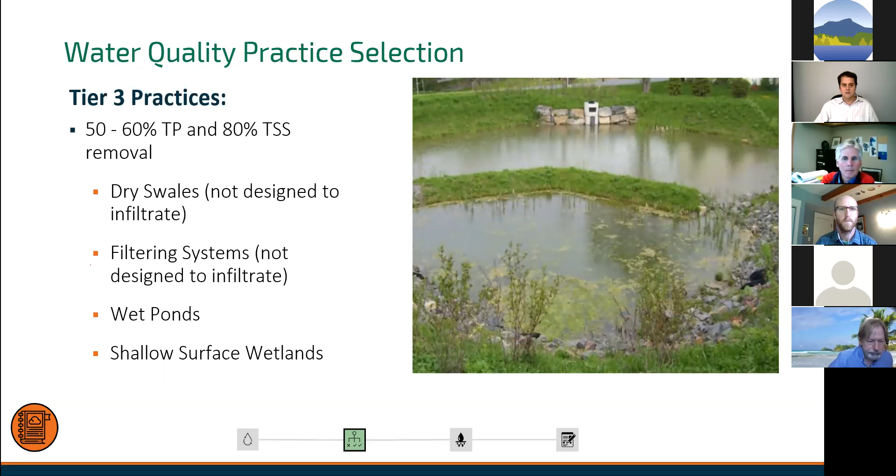So before we move on, any quick questions that have come up? So Andres, Sarah provided a question about basically the design lives of these particular systems and whether we actually change the planting plans to reflect specific characteristics of the site in regards to toxins or anything else that wants to be treated as part of the system.

Yeah, that's a great question, and that gets into a lot of the operation and maintenance discussion that we're going to have tomorrow about the approach for operation and maintenance and what the state requires in terms of reporting on operation and maintenance. There's a lot of visual cues which can lead a designer and inspector to understand how well a system is functioning, to be able to determine what needs to be done to maintain or, in some cases, fully restore a system. So we're going to go over that.

And I think the question about, do you encourage certain plants for certain situations? I've definitely read some literature on that. And I know that there are some plants which are specifically shown to do well for, say, metals removal. I think that in the context of the state permitting program that we're discussing, it would seem like the state would have no issues with developing a plan specific to that. I don't think that comes into a permitting question at all.

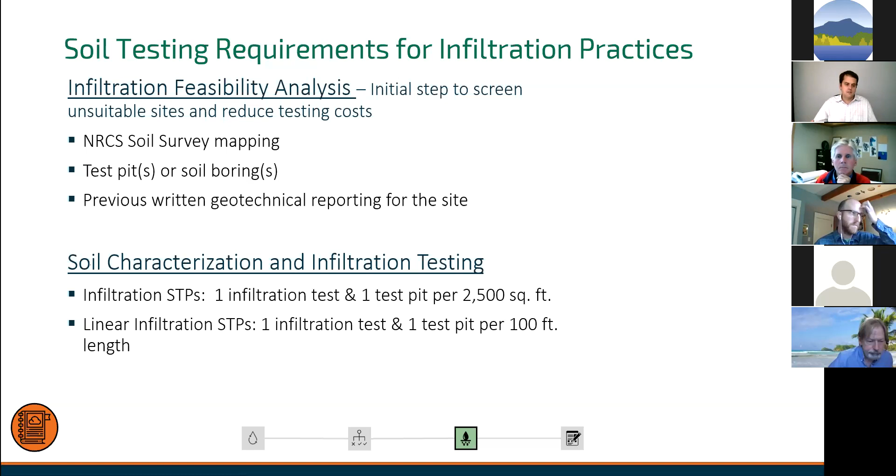So once you do the initial feasibility analysis, the soil characterization and infiltration testing requirements: for infiltration practices, you need to have one infiltration test and one test pit per 2,500 square feet. And for linear infiltration STPs, say an infiltration trench, a long, skinny infiltration system, you need to have one infiltration test and one test pit per 100-foot length. So it's not based on square footage, it's just every 100 feet, boom, boom, boom, you need to have a test.

So the test pit requirements are a test pit or boring, can be either, needs to be advanced to a depth of at least 1 foot below the required separation depth to the seasonal high groundwater table. So I had mentioned in the case of infiltration structures, you need to have a minimum of 3 feet of separation from the bottom of your facility to the seasonal high groundwater. So that would mean you have to go 1 foot below, total 4 feet, right?

You need to provide soil profile descriptions and verification that the depth to the seasonal high groundwater and bedrock meets the STP separation distance requirements. And I'll mention for bioretention areas, and I think infiltrating sand filters, your seasonal high groundwater can be right up at the bottom of the filter layer.

So just to give the context of why there's this variation with 3 feet and then less than 3 feet for bioretention and sand filters: in an infiltration trench, the stormwater goes in and the whole structure is really just designed as a conduit to get the water from the surface into the ground. There's no treatment mechanism in there, not necessarily. It's just, say, an open stone bowl or something like that. So the water is just designed to go in and go right to the groundwater. So we need to have that 3-foot separation so that the treatment can be occurring from the bottom of the structure before it reaches the groundwater table.

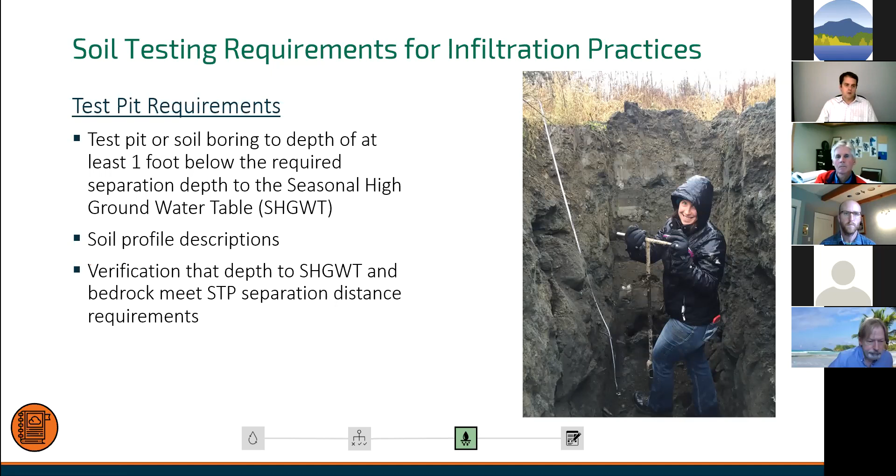In the case of, say, a bioretention area or a sand filter, the treatment is occurring within that filter layer. So there's a required 24-inch sand or specific soil media section, which is basically doing that treatment. So by the time the water gets to the bottom of that section, it should be treated. And that's why the groundwater can be right at that level, because then we can discharge it into the groundwater. That's my understanding of why there's that discrepancy there.

thing. And the most critical thing in terms of what we're interested in is how to define the seasonal high groundwater table. And there's a ton of information on this out there. For wastewater designers, it's a huge consideration too. They need to be super aware of how to do this. So there's a lot of documentation about how to define the seasonal high groundwater table. And it's not always easy.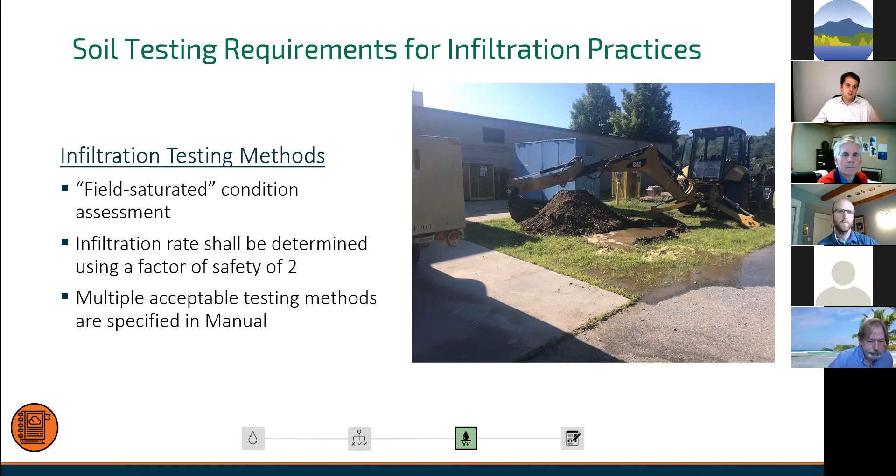And I think after this, we just have one more section, which is going to be pretty straightforward. It's just the administrative form section. So any discussions? I'm looking at, looks like a risky trench. Yeah, it was. One copy may be ordered. Okay, great.

Yep. So there's a link for the NRCS distribution center. Entering the keywords field book and then order by phone. So that's great information. Thanks for sharing that. I'm not seeing any other questions on that. Dave, do you have anything to add? Anybody else want to add anything on that section before we move on? No, I'm good for now. Thank you.

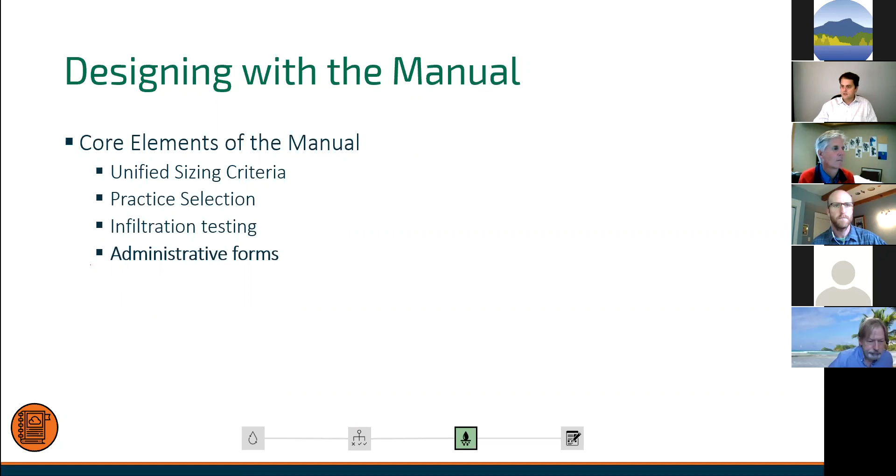All right, so the last section here for the day, just going to go through the administrative forms. I don't believe there's been any changes to this, but if there's anything that you guys are now requiring new that you need to correct here, please jump right in. Okay.

Really just talking about the permit application materials. There's a link here when you get this presentation that will bring you right to the page where all the 2017 application materials are kept. There's some great examples on there in terms of mock site examples. If you're doing an application for the first time and want to put together the proper forms in the proper order, the DEC also has a good reference document on that.

Win, is that still on your site, the one that goes through all the application components? It is, yes. And we update that fairly regularly as needed.

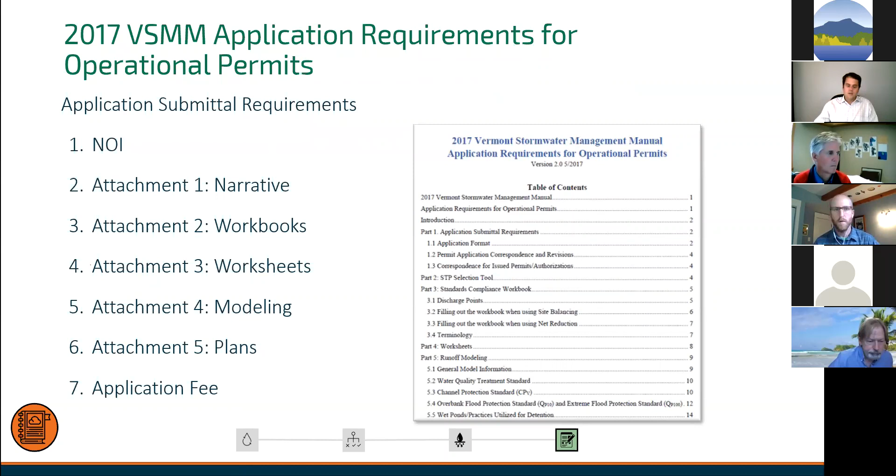So in general, you have these 7 components. There's the notice of intent, and then the supporting attachments that go along with it. Attachment 1, the narrative; the workbooks, attachment 2; attachment 3, the worksheets; attachment 4, the modeling; attachment 5, the plans; and then the application fee, the all-important application fee, right?

So the notice of intent, we're looking now at general permit 3-9015 and individual permit. Again, we talked about we're in a state of flux here. On the bottom, general permit 3-9050 will now cover new development, redevelopment, 3-acre sites, discharges to impaired waters, cover everything starting December 1st, 2020. So the 9015 is going to be retired. But currently, there's a 14-day public notice period for a general permit and a 30-day public notice period for an individual permit.

One of the newer things in this 2017 manual, site balancing and or net reduction design strategies are eligible for general permit coverage. So what does that mean? Site balancing is essentially where you're treating one area that you may not be required to treat in exchange for not treating another area that you are required to treat, such that the net benefit is the same. That used to require an individual permit through the agency, and it's now allowable under a general permit. So it's made doing that site balancing easier.

The situation where you need an individual permit: if you're discharging in a stormwater impaired water, the ANR Atlas has a coverage for that, you can see where those are. Or if you're using an alternative STP, where the state has gotten this approval that it meets the standard, you need to seek an individual permit for that. And the final requirement, you need to notify adjacent landowners. That's not necessarily a requirement for a general permit.

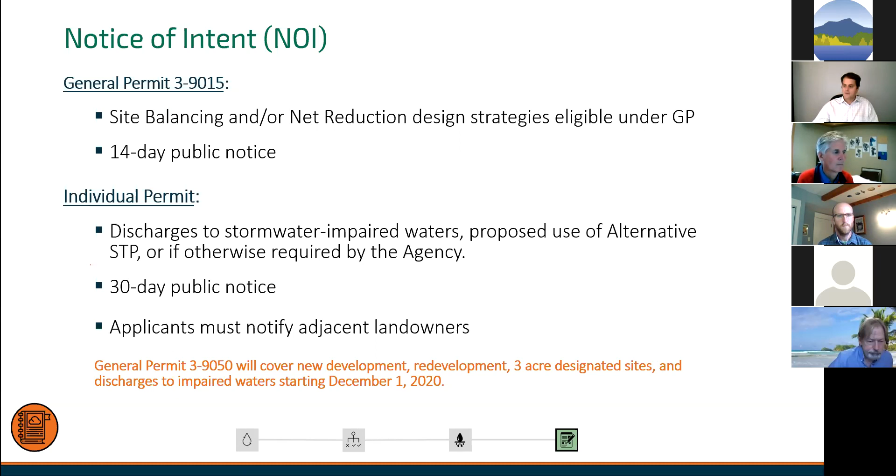So notice of intent, I think the newest thing on this is that you do need to check off boxes with respect to whether or not you're working in a regulated wetland or wetland buffer, regulated floodplain or river corridor, or within a stream channel. I think it's just a way for ANR to coordinate on reviews, making sure things are caught ahead of time where there's other regulatory requirements. You also need to report on whether or not you're in a hotspot land use or activity.

So getting into the attachments, the narrative attachment, the key to that is you're just explaining the project first. For Win or any of the other reviewers that have no idea what this project is, it's introducing them to the project, giving a little summary of what the project is, what the existing conditions are, what's proposed for treatment, how much impervious area you're talking about.

And the ANR has a great template. This is the template, and it's available on the website to start from. It tells you exactly what you need to have included in there. And in addition to the narrative, the project location map and a soils map is part of attachment 1.

Attachment 2, the workbook. We're going to get into this tomorrow. There's a series of Excel sheets that the DEC has that make it a lot easier now to plug in the information that the DEC needs to see to figure out your volumes, to figure out how you're complying with the manual.

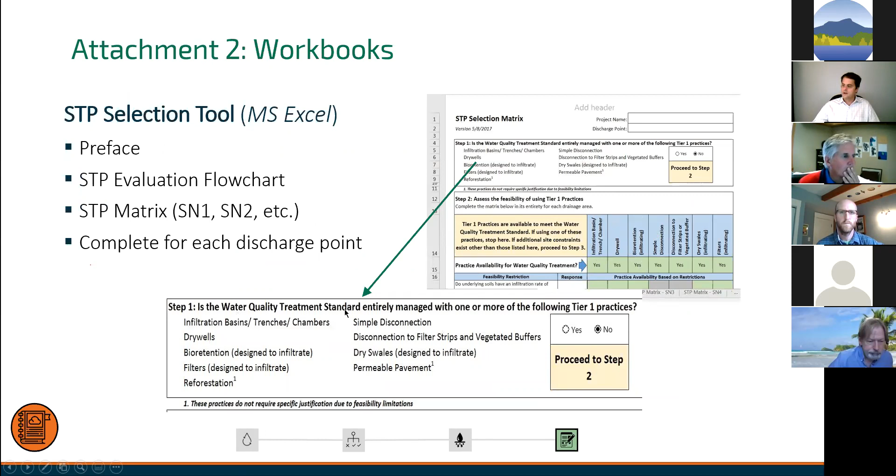And it's going to tell you whether your practice is available. Essentially what you're going to do is you're going to answer, you know, can you do a tier 1? If you check yes, you're done. If you don't, then you're going to go through all these other questions. And it's going to tell you what practice is available.

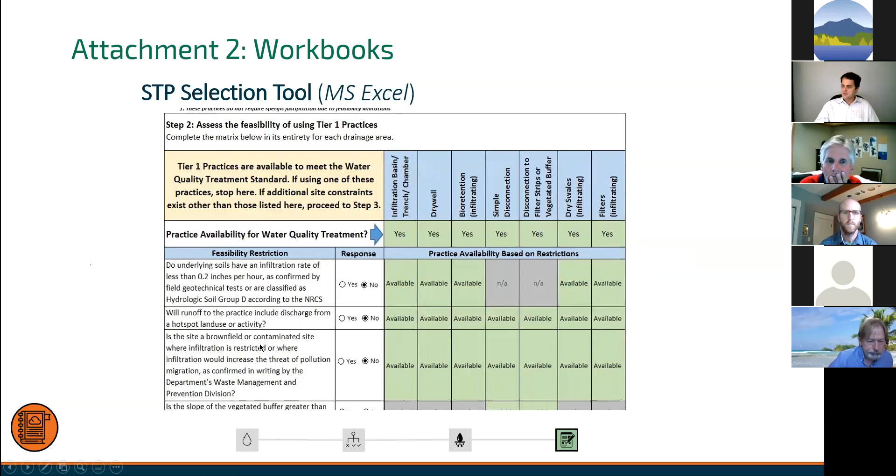And if you get down to the bottom, like I was saying, and you can't even do a tier 2, then you're going to have a space at the bottom to provide written feasibility justification for why you can't do a tier 2 practice. And that's what it's saying right here. Provide written site-specific justification below.

Standards and compliance workbook. So just so you know how it works, there's a tab, which is the instructions tab. And it tells you that the blue boxes you need to fill out. The yellow boxes are optional. Gray boxes are calculated. So when you open it up, there's going to be a tab, and you do a tab for each discharge point. So if you have 3 discharge points from your project, you're going to do a tab for 1, 2, and 3.

You're going to fill out your land use information. You're going to fill out your precipitation information. You're going to fill out the latitude, longitude, the project name, all this. We're going to go through this tomorrow, but this is just a snapshot of what it looks like.

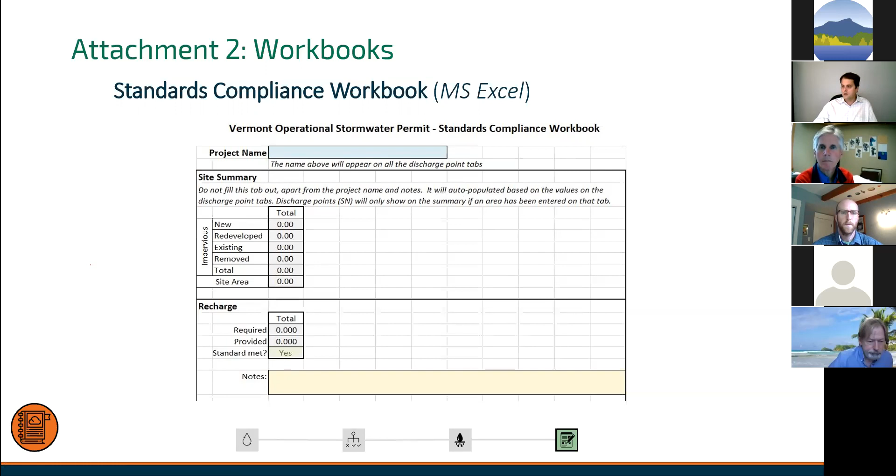Moving down a little further, once you fill this out, it's going to tell you, here's one of your standards: recharge, standard met, yes. If it didn't meet, it would say no, it would be in red. Doesn't always work exactly like planned, and that's one of the things we're going to look at tomorrow. But just to give you an idea of flavor, you can see there's gray cells. Here's a blue cell, so we're going to have to go here and look at this. Is all impervious treated by disconnection, yes or no?

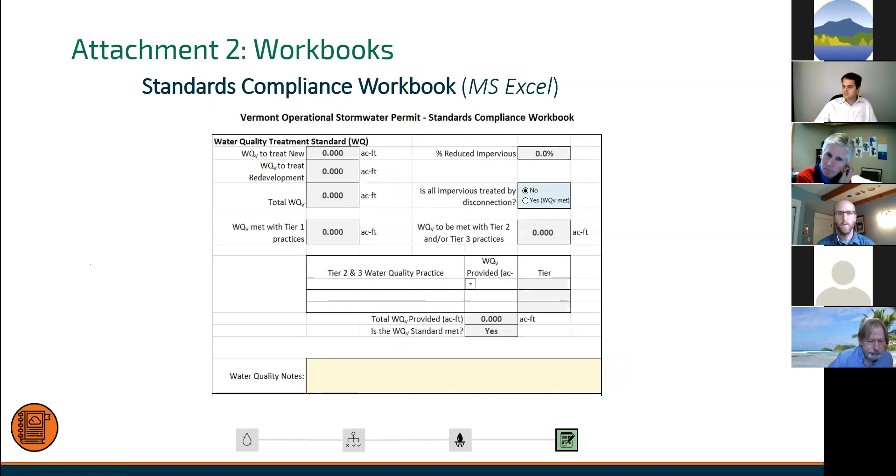And then the worksheets. So I was saying the worksheets have to be done before the workbook. And so the worksheets are the specific worksheets for the practice. So there's one for the post-construction soil depth and quality. So that's just more of a checklist, making sure that you have all the appropriate information for the soil standard, if you remember that, the 4% soil standard.

The STP worksheet, so say if you're doing a gravel wetland, you're going to do a specific worksheet for the gravel wetland. You're going to enter the volume of it. Essentially you're going to get the treatment volume that gravel wetland is providing. And then you're going to take that number and put that into the workbook. So that's why you need to do the worksheet before you can actually put that number into the workbook.

Also in attachment 3, you're going to have your soil characterization and testing information.

Attachment 4 is going to be all the modeling information. So it's going to be water quality storm modeling, so that's the 1-inch storm modeling, and it's also going to be the channel protection modeling, so the 1-year 24-hour storm event model, and the higher flow models, the 10 and 100 detention standard modeling, and then any downstream analysis. And we talked about that before for the 10-year or the 100-year.

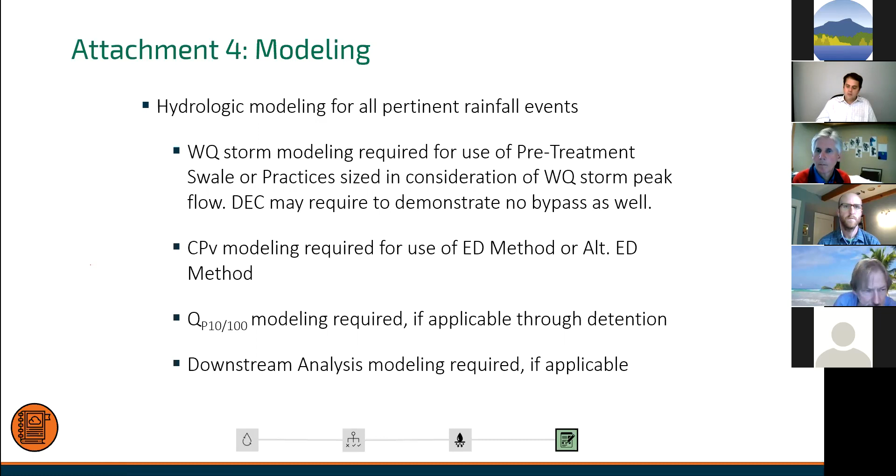And then attachment 5 are the plans. So you have your existing conditions plans, your proposed conditions plans, all your construction details. And I know that DEC, I think, is pretty specific. They don't really want any irrelevant details necessarily, if you can help it. They don't need to see wastewater details. They don't need to see structural details. They just really need to see the stormwater details.

So if you can think about that ahead of time and organize your sheets that way, it'd probably be better, because every sheet that goes in then needs to be recorded, right, Wynn? I think that's what you guys say, right? Yeah, that's right. And I guess changes to unneeded information would just be another change that has to get recorded. Right. Good point.

So in the plans, the sub-catchment boundaries are critical, and just a note on that, you have to make sure that your boundaries are correlated to the model, which is in attachment 4, so that somebody could pick up the plan and see your watershed boundaries, and the same label is going to be in the HydroCAD, so you can correlate between the two. Sometimes that doesn't happen, and so that's important.

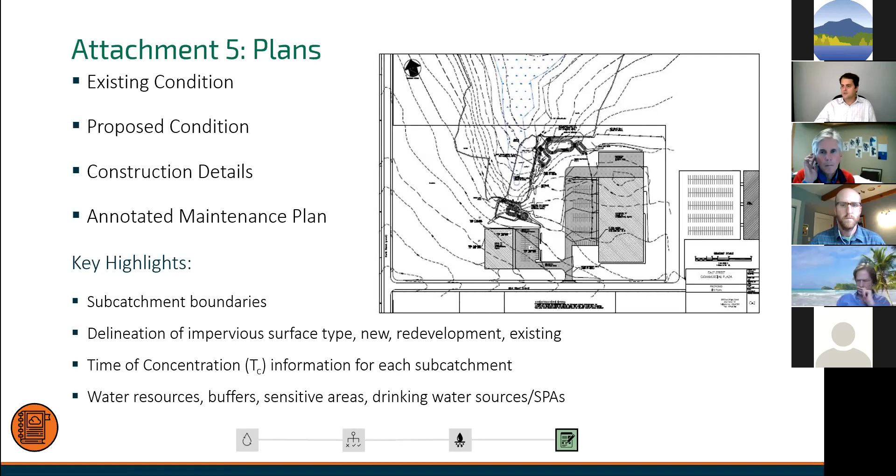And the application fee with the NOI does a nice job now auto-calculating. You put in your impervious area, it will auto-calculate your fee based on the administrative fee, which is a flat fee, but then the review fee is based on the amount of impervious surface, and also whether you're in a class A or B water. You're going to pay more for a class A, so you do actually need to understand if you're in a class A or B. But then if you answer those questions, the fee calculates on the NOI.

And the state has now been moving to submitting payment through the online portal, which I think is making things a lot easier. And actually, you're also accepting applications through the online portal too. Is that correct? Yeah, that's right. Preferably, really. And there's a whole process on that to set up. I'm going to go through that a little bit tomorrow for the inspection stuff, about how you get on to the ANR online, set up an account, get in there. But everybody's going to be migrating to this digital submission, which is great, makes things a lot easier.

And just repeating on what was noted about not providing extra information. So building footprints would definitely be included. What I was referring to as extra information would be something not relevant to stormwater. So a lot of times with a plan set, you might have a sheet which just has the details for the wastewater system, so the mound or whatever it is, totally unrelated to the stormwater. If that's the case, you don't really need to include that sheet because Wynn doesn't really need to see that. Anything related to the buildings is really critical, but something not related to stormwater in terms of constructing it is not relevant to his review.